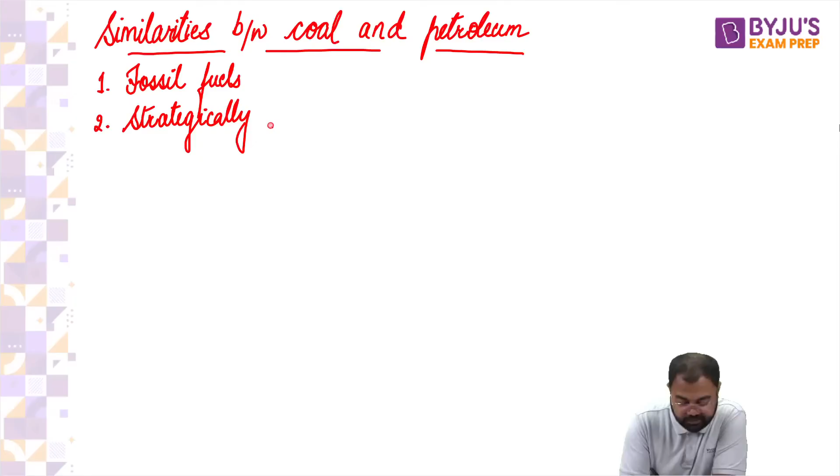So when it comes to petroleum, there are certain similarities and certain differences. Knowing the differences specifically is very important, so let's try to understand how exactly they are different and how they are similar. Similarities between coal and petroleum: they both are fossil fuels, strategically important for a country's economy, and both contribute to pollution and global warming. So these are certain similarities between coal and petroleum.

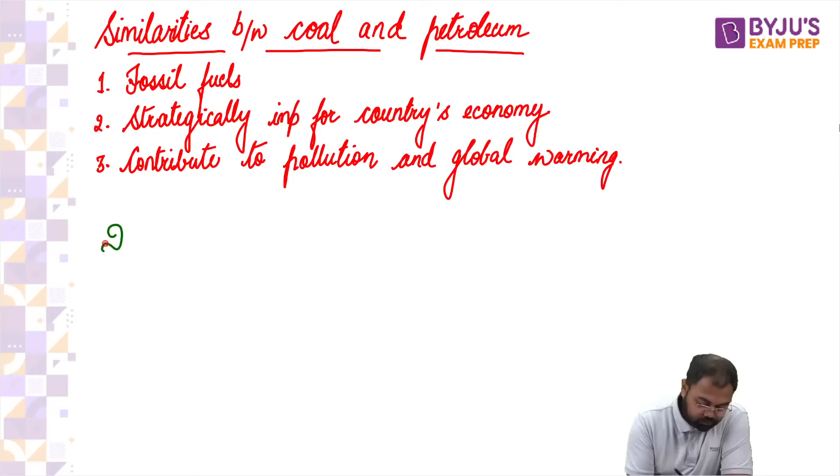Now what about the differences? Let's look at certain differences between coal and petroleum. First and foremost, the origin. When it comes to coal, we discussed that coal formation might have begun in the wetlands, in the marshy areas, in the swamps on land - so swamps and wetlands.

Now what about petroleum? In case of petroleum, the formation might have begun underwater. So the origin here has been underwater, meaning it started its formation underwater - it could be lake beds, sea beds, or ocean beds. In most cases seas and oceans, but even inland lakes might also have led to the formation of petroleum. Another difference between them is the source.

Now, the source for coal has been vegetation - all the trees and shrubs, etc., growing in these swampy areas contributed to the formation of coal. So the source has been basically vegetation on land, whereas in case of petroleum, that's not the case. In petroleum, there might have been both plant and animal based sources - it could have been algae, or it could have been zooplanktons. So both plant and animal based.

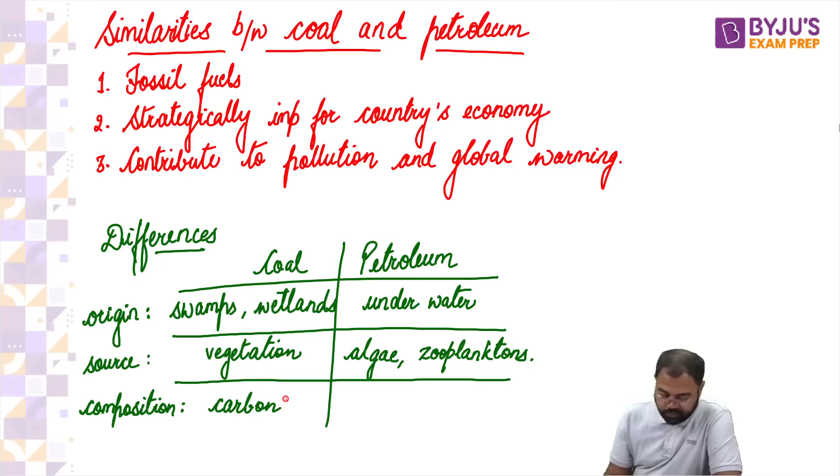Then another difference we see is the composition. Coal is carbon plus impurities. Coal is basically supposed to be carbon, and certain impurities might have mixed with it over time. Now overall, petroleum is said to be a complex mixture of hydrocarbons.

Hydrocarbons - what is hydrocarbon? We'll discuss this. So petroleum is made of a complex mixture of hydrocarbons. And then lastly, the state: coal is in the solid state, whereas petroleum could be solid, liquid, or gaseous. So state-wise also we see there's a difference.

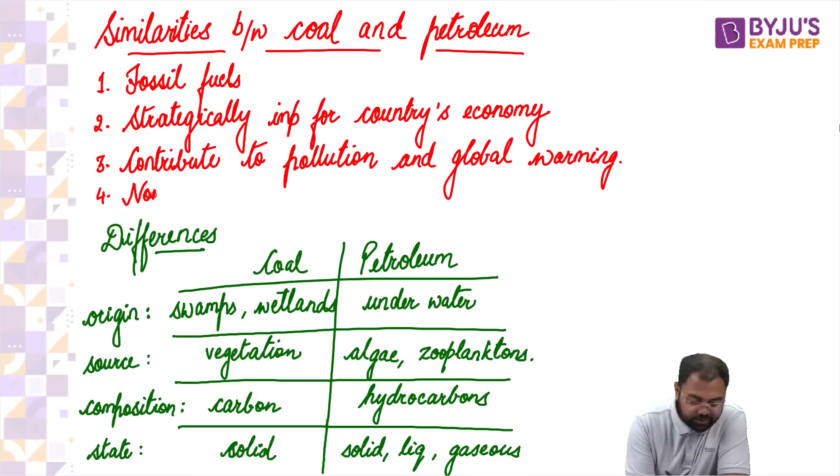So when you look at the science side of it, that is where you see that they are different. Otherwise, the other factors show similarities between them, and that's why they're often counted together. One major thing, very well known, but I missed it - they both will be called non-renewable. So in this manner, we see there are certain similarities and certain differences when it comes to coal and petroleum.

So now when we talk about petroleum, we are saying that petroleum is a complex mixture of hydrocarbons. So what do we mean? What's the basic meaning of complex mixture of hydrocarbons? What do we mean by a hydrocarbon?

So the name basically gives you a hint that you are talking about an organic compound. Organic compound meaning carbon based compound. Hydrocarbon - where you have only carbon and only hydrogen, any compound, any matter, any kind of material that has only carbon and only hydrogen. Apart from hydrogen and carbon, it does not have anything else. Then in that case, it will be called a hydrocarbon.

Now here we are saying that it's a complex mixture of hydrocarbons. Complex mixture means you might have a lot of different types of hydrocarbons which are really mixed together. That's why you cannot assign a chemical formula to petrol or diesel, because these are complex mixtures. There is no guarantee what exactly could be the chemical composition - there will be a mixture of all these hydrocarbons.

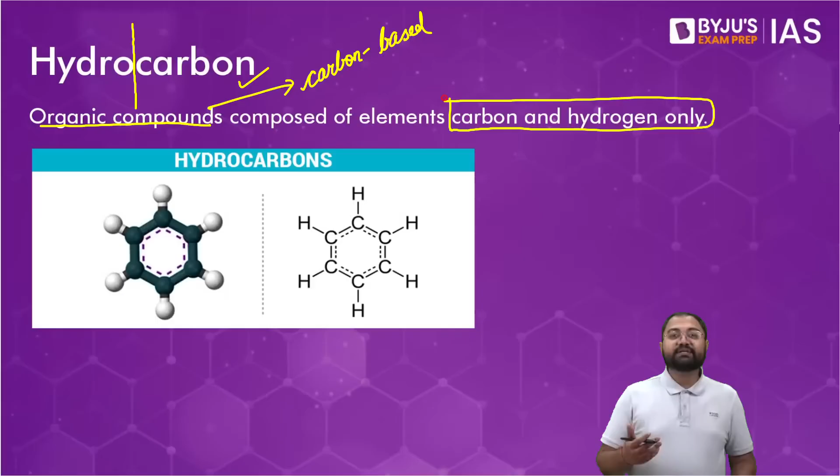So complex mixture - I'm just noting it out here. Complex mixture because it has many different hydrocarbons that could be mixed together in a petroleum product.

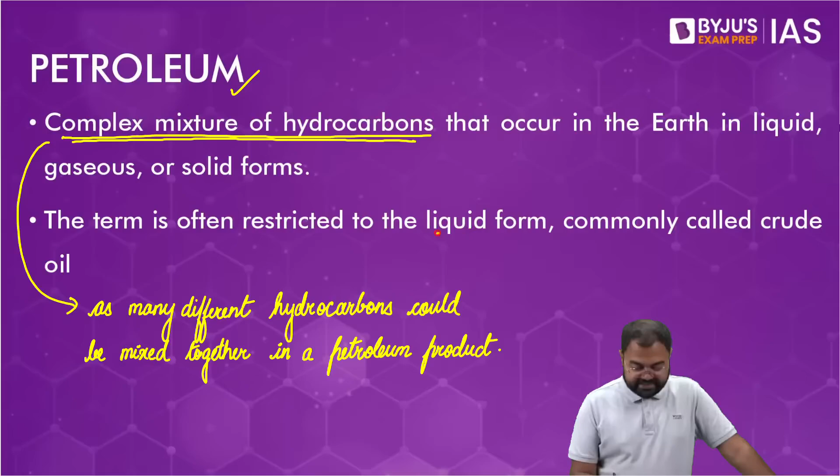So that is basically how we talk about petroleum, how we see petroleum. Often we restrict this petroleum to its liquid form, which is called crude oil. Crude oil is, you can say, the raw petroleum. And from this crude oil, we get all these different types of petroleum, whether it is diesel, petrol, kerosene, jet fuel, naphtha, or even paraffin, wax, etc. All these things are the things that we get from this crude oil. So crude oil basically is a mixture of all these different types of petroleum products.

Now what we need to do is separate them out, and to separate them we basically use a method called fractional distillation. But how exactly we do that, we'll have a discussion on that. But before that, let's also talk about how the formation of petroleum happens.

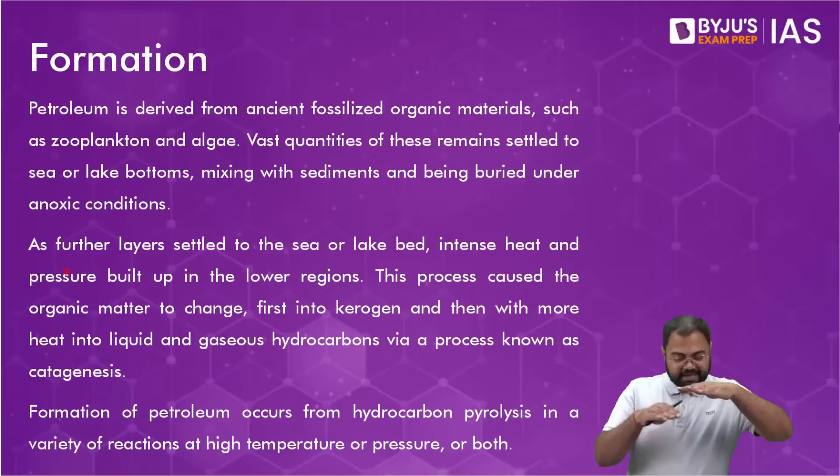Very similar to what we discussed about coal, the entire process is very similar. First and foremost, the formation here also would have begun from organic material like underwater plants and animals. They might have gotten submerged under the seabeds or ocean beds, and while getting submerged, they would have mixed with all the sediments. As they get submerged, they are going to get subjected to very high temperature and very high pressure. Under these conditions, a chemical change would have started in these organic materials.

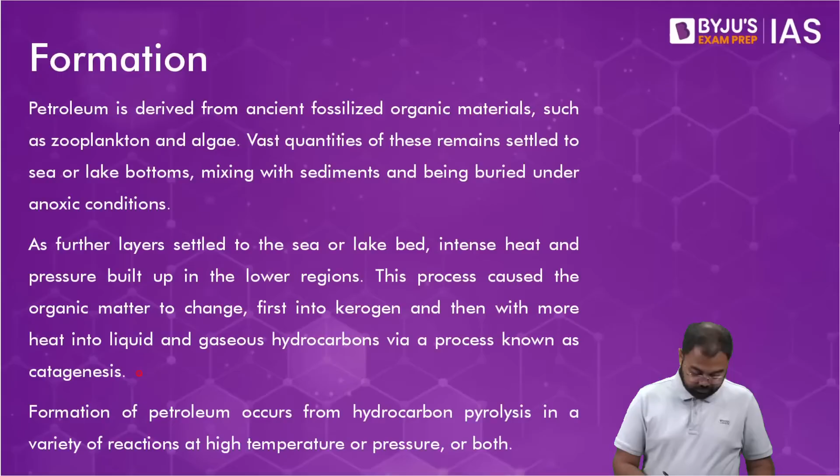That is where the formation of something called kerogen first takes place. First and foremost, they convert into something called kerogen. Kerogen is, you can say, an intermediate stage between that plant or animal and the final petroleum product. So between the two, the intermediate stage that we have is called kerogen, which is in a manner the in-process of change of the organic matter into petroleum. So first the formation into kerogen happens.

Now, in catagenesis, these longer chains of organic molecules start breaking down into smaller chains of molecules. So from an 80-odd or 90-odd carbon chain, you might see smaller carbon chains of just 10, 20, 15, 8, 7, etc. That breakdown from longer carbon chains into shorter or smaller carbon chains is called catagenesis. So that's why the next process here is catagenesis.

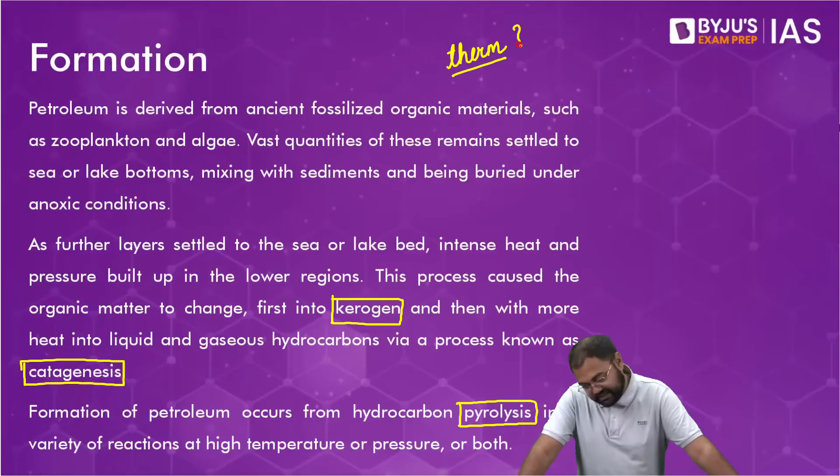Thermochemical—therm. Do you know what the term 'therm' is often associated with? Yes, absolutely—heat, as many of you have mentioned. So when we say thermochemical decomposition, it means there is a chemical decomposition of the material happening at high temperature in the absence of oxygen. That's called pyrolysis. So these three terms, these three processes, are the key processes to the formation of petroleum from the organic molecule of the plant or the animal.

Understood? So first and foremost, you have kerogen. What is kerogen? Kerogen is an organic molecule which is an intermediate stage between the organic material and petroleum. This is basically called kerogen. Now, after that—I'm just writing one more thing here—it is often found as sedimentary rocks.

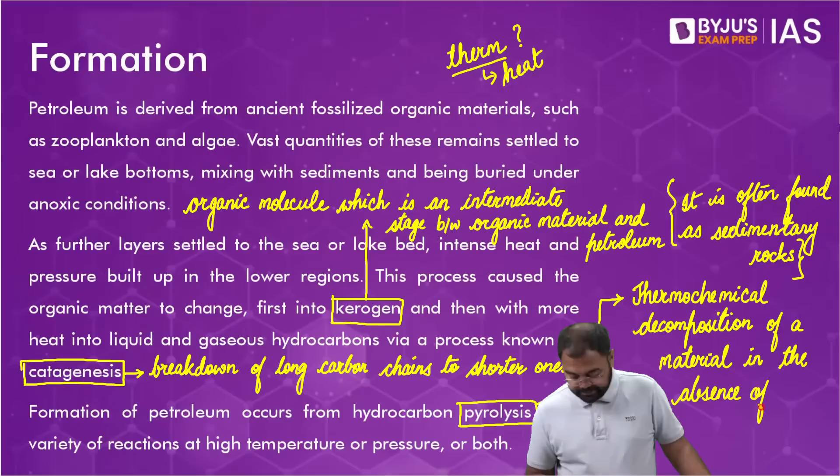And then finally we have pyrolysis. So what is pyrolysis? Pyrolysis is the thermochemical decomposition of a material in the absence of oxygen. So this is called pyrolysis.

So all these processes together lead to the formation of petroleum finally. Now this petroleum product that we get, we get it in the form of crude oil. This crude oil is a mixture of all the petroleum products, petrol, diesel, kerosene, etc. They are all mixed in this crude oil, and we need to get these products out of it.

So for that we use a process which is called fractional distillation. Now when it comes to fractional distillation, understand what exactly we do here.

Distillation is a process that we often use whenever you have to separate two miscible liquids, meaning when two liquids mix in one another. If you want to separate them, distillation is the process we'll have to use. For example, if you simply mix water in milk, milk and water are not directly separable, then you'll have to think of another process.

Similarly, a lot of organic liquids, when they mix in water, are completely miscible - they would completely mix with water. So if you have to separate out these two mixtures, you'll have to use another method. Distillation will be used when you have two liquids which have different boiling points and are miscible, meaning they can mix in one another but they have different boiling points. Then distillation is the process we would use.

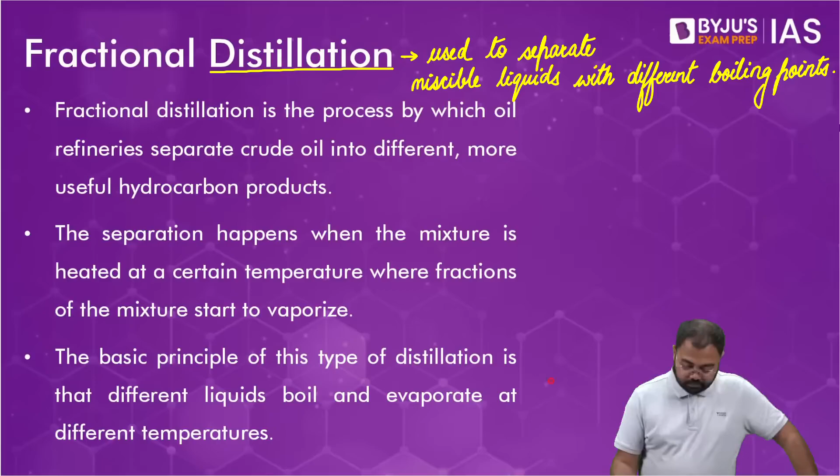So we first heat it above 400 degrees Celsius, and then we start to cool it down slowly. Slowly we'll start to cool it down, and we'll see that one by one we'll start getting all these different fractions, all these different types of petroleum. So at 400 degrees Celsius, first you'll get lubricating oil, paraffin wax, asphalt, etc. And as you keep decreasing the temperature, you'll keep getting all the different types of petroleum. That is basically when fractional distillation is used.

So fractional distillation is something that we will use when the difference in the boiling points of the liquids or fluids is generally less than 25 degrees Celsius. So when the difference in the boiling points of the liquids or fluids is less than 25 degrees Celsius, then fractional distillation as a process would be preferred.

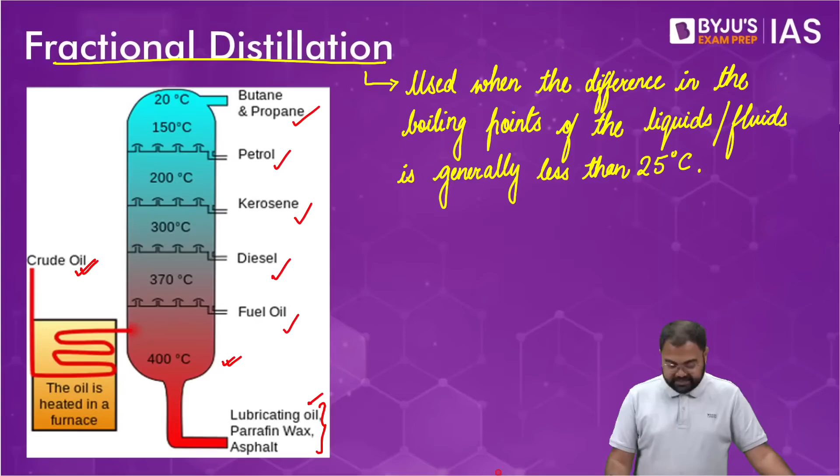So this is basically what we do: fractional distillation will be used when the difference in boiling points is very less, and normal distillation process would be used when the difference in the boiling points is good enough. So this is how this process of distillation or fractional distillation is used, and this is how we get all the different types of petroleum products.

Now, apart from coal and petroleum, there are some other non-renewable sources as well, which are non-conventional sources. Why are we saying these are non-conventional and non-renewable? Non-renewable, obviously, because they are available in a very limited quantity. But at the same time, they are also non-conventional because they are newer sources of energy that we haven't known about traditionally, and haven't used conventionally. That's why these are called non-conventional and non-renewable sources, where the first source here is shale.

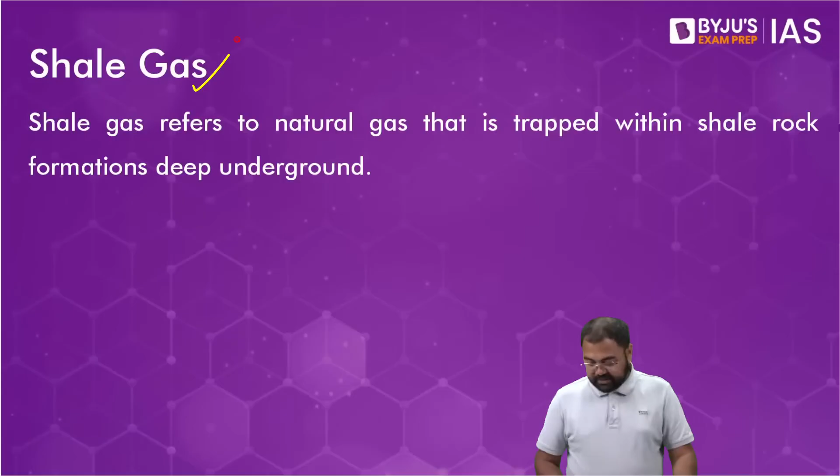Now, when it comes to shale, what we see is that shale is something that we get from a layer of shale rocks. We basically drill a well to this layer, and once we have gone to this layer, this is where we also start drilling horizontally.

As we drill horizontally, this is where cracks are produced in this layer, and that is where we have a lot of trapped gas, which is called shale gas. These are also hydrocarbons, largely methane and ethane, but they are trapped in this layer of rocks called shale rocks, and that's why the gas we extract from there is called shale gas. So this is basically how the extraction of shale gas happens.

Now, when it comes to shale, why are we saying that this is an unconventional source? We are saying that this is non-conventional and non-renewable. Now, this basically is a newer source, as I told you.

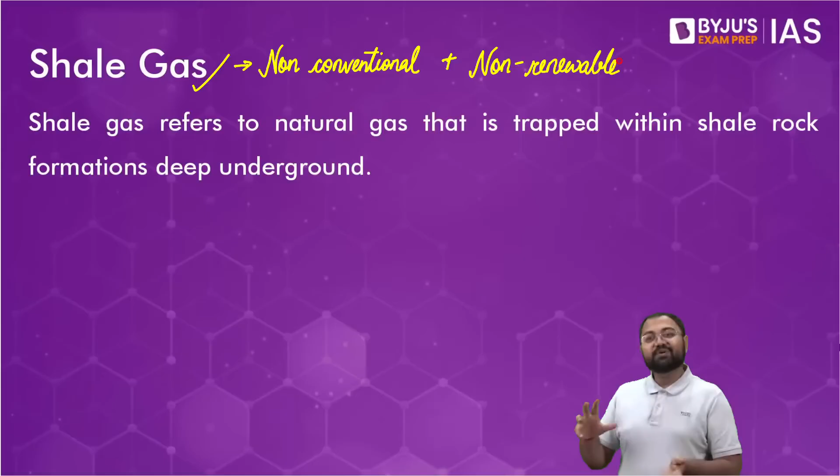First it was the US, and the US found that they have large deposits of shale. The amount of shale resources they found is so high that the US, before the discovery of shale, used to be a net importer of energy—they used to buy energy because they had a deficit as per their requirements. But after the discovery of shale, and finding such a huge deposit, they started becoming a net exporter of energy. So that's the difference that has come here.

The US was the country that found shale gas, and then others also. In a manner, a natural justice was done by God - Russia also found a lot of shale. So there is a balance: Russia has shale, the US has shale, and China also has shale. That's why the world is relatively at peace, or at least these powers were able to find sources of shale, which became a non-conventional, non-renewable source of energy.

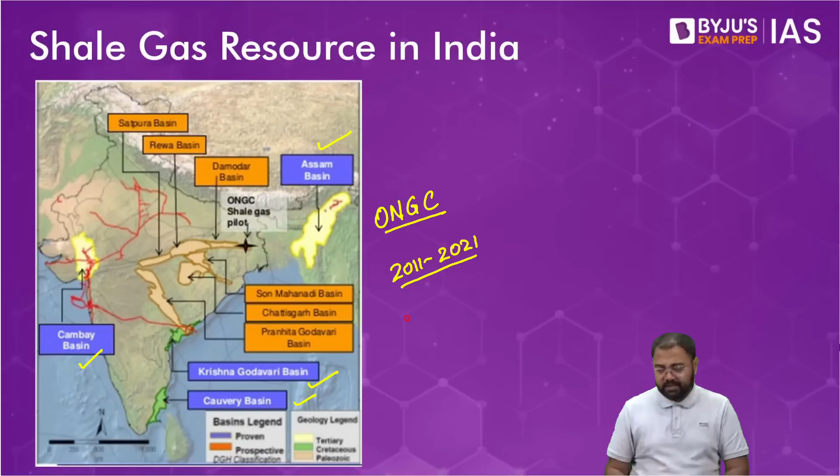We cannot look at shale as an alternate source, but we can see it as a small additional source. Perhaps we'll start extracting energy from here, but the promise is not great, so we cannot be dependent on it as a future source of energy. Although there is a pilot project running, ultimately they said they are not very hopeful regarding shale in India - the source is very weak and very little.

Overall, with shale extraction there are issues we see. It increases consumption of fresh water, because with drilling we send water at high pressure - called hydraulic pressure. This high hydraulic pressure causes fractures, called hydraulic fracturing. The drilling sends water at very high pressure to create cracks in the shale layers, so the consumption of fresh water is very high.

It can also lead to increased seismicity, meaning increased earthquake-like scenarios, because you are creating an imbalance and instability inside the earth. Then potential ground and surface water contamination is also possible, because this water might mix with underground water bodies. This fresh water isn't just fresh water but also has certain additives and chemicals added, which also pollutes the water.

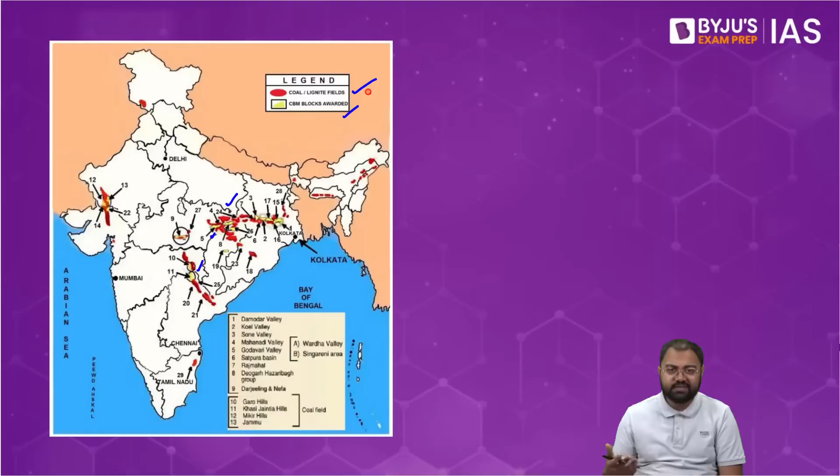The coal ministry has also said that they'll be actively trying to extract coal bed methane wherever possible. Otherwise, all that methane gets wasted, which is not good, because we know we can use this as a source of energy.

Now, after this, we have methane hydrate. When it comes to methane hydrates, what do we mean by hydrate first of all? Water, right? So wherever you have molecules of water, any compound with molecules of water will be called a hydrate.

Can you give me the example? Otherwise, I'll give you. What is the hydrate molecule that we are using in our daily life? Salt is a crystal, not exactly. Soap in a manner, you can say, but a better example would be washing powder.

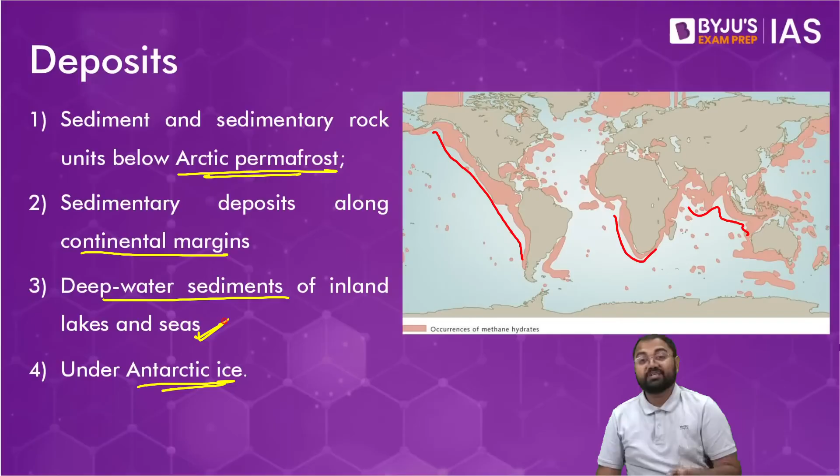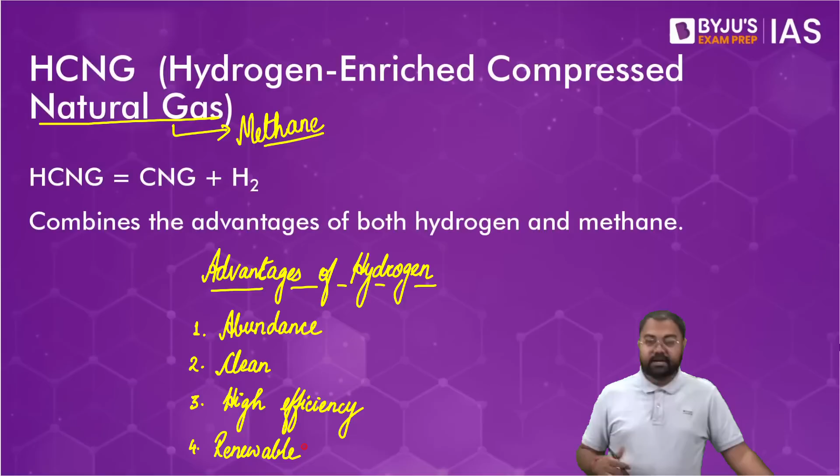In a manner, you can say that hydrogen becomes closer to being renewable. So that also adds to the advantage, and that is why HCNG. With HCNG, we see that it will be able to reduce the emissions of carbon monoxide, enable fuel savings, and the engines can be calibrated to release lower amounts of nitrogen oxides.

Similarly, we see that the modifications required in engines are also very minimum. If an engine is running on CNG, it will run on HCNG also. So it's not that we need new infrastructure or new types of engines altogether. Engines that work on CNG would, with very minor calibrations, be able to work on HCNG also.

Then after that, it can be used for high load applications and heavy duty vehicles, buses, trucks, etc. So there also we can make use of HCNG.

And that is basically what we also saw, that in Delhi, a pilot project was taken by the government of India where they started running buses in Delhi on HCNG as a pilot project, just to understand the viability of using HCNG and see whether we are in a position to start using it. For almost 6 months, a few buses in Delhi ran on HCNG to test it out. Now we are analyzing all the positives and negatives from that project, and depending on that, in the future we'll look into the viability of running public transport on HCNG.

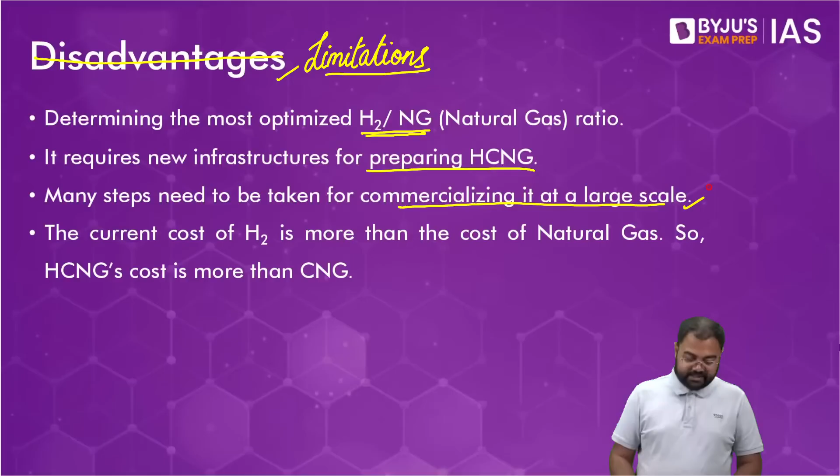And obviously the current cost of hydrogen is also a problem, because right now the cost of hydrogen is more than CNG.

When you are making HCNG, combining the two, the cost of production of HCNG will be higher than the cost of production of CNG. That becomes a problem because if you want to use it for public transport, you cannot ask the public to pay more. The government will have to take the responsibility for this economics spending. So from that perspective, this is not that great right now. The cost of manufacturing hydrogen is leading to this kind of issue, and that's why these are all limitations.

In the context of proposals to use hydrogen enriched CNG or HCNG as fuel for buses in public transport, consider the following statements. First, the main advantage of the use of HCNG is the elimination of carbon monoxide.

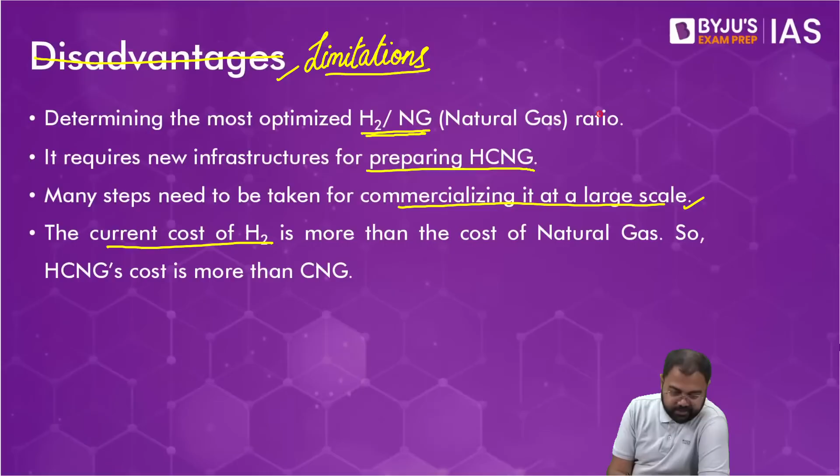Elimination. Remember we discussed something called extreme words, right? So elimination can also be bracketed as extreme. Elimination means completely getting rid of carbon monoxide. But what did we discuss here? We discussed that it reduces the amount of emissions of carbon monoxide. We cannot say that it eliminates carbon monoxide.

So elimination is wrong. A cannot be your answer and D cannot be your answer. You are left with either 2 and 3 only, or 4 only. So let us look at 4. Only one statement to see.

HCNG makes the fuel less expensive than CNG. It's the opposite, right? We discussed that hydrogen production is costly, so it will increase the cost of CNG. That's why HCNG is costlier compared to CNG. So 4 is wrong. Anyway, we are left with only 2 and 3 only.

So the second statement is HCNG as fuel reduces carbon dioxide and hydrocarbon emissions. Yes, that's correct, and that is why we are looking at hydrogen, because hydrogen is clean. We had discussed this. Hydrogen up to 1/5 by volume can be blended with CNG as fuel for buses.

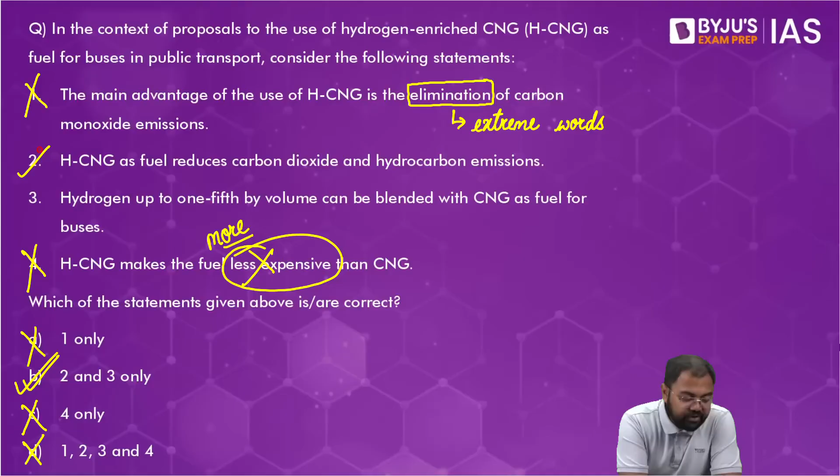Now see, this is a difficult statement. I would never be able to mark on the basis of statement number 3 unless I have the exact information from the newspapers. So that's why statement number 3 could have become difficult.

But as you see, in this particular scenario, we are not dependent on statement number 3 to answer this question. Yes, if they come to the present format, where they are asking whether only one statement is correct, or two statements are correct, or three statements are correct, or all four statements are correct, that is where this becomes an extremely difficult question to answer.

But with the elimination technique of the past, now the elimination technique also has not been eliminated completely. Yes, there still are such questions, but this time the number of those kind of questions was huge. There were, I think, 49 questions, if I'm not wrong, where it was one statement only, two statements only, and so on kind of question pattern. In that pattern, it would become a very difficult question, because statement number 3 is very factual and makes it extremely difficult to answer. But with the elimination technique that works here, it becomes easier for us to answer this question.

All right, so this is it about HCNG. Now this basically brings us to the end of all the non-renewable sources of energy. Now we come to the renewable sources of energy, and this is where we start with solar energy. So the first energy source is solar energy.

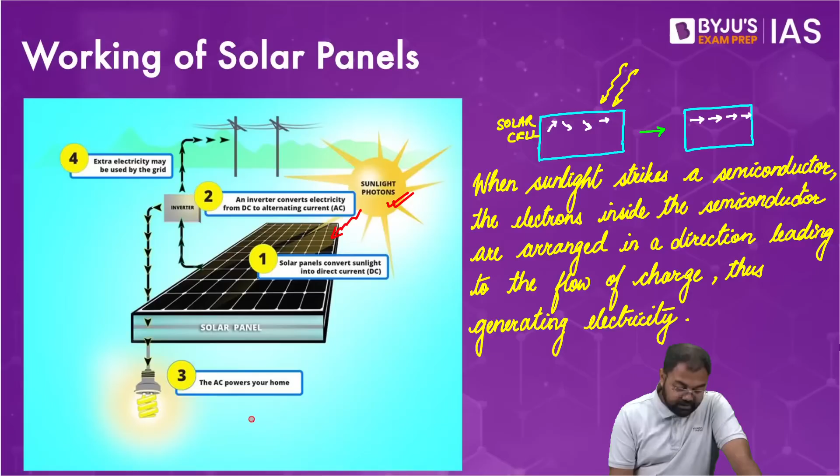And these solar panels produce electricity where the charge flow happens in one single direction. That's why this is a kind of current called direct current, or DC, and this DC has to be converted into AC, or alternating current, if you want to provide electricity to the houses.

So for that we use an instrument called an inverter. With the help of an inverter, we see that the direct current can be converted into alternating current.

Now direct current is the kind of current or electricity that we can store. For example, any electrical or electronic device that uses a battery - inside the battery you have stored energy or stored electricity that you can use whenever you want. So that is direct current, the stored electricity or stored energy.

But that's not something our houses use for providing electricity. For that, there's another form of electricity called alternating current. It's called alternating mainly because it alternates its direction, reversing multiple times in a given second. So the power supply we get in our houses is basically alternating current.

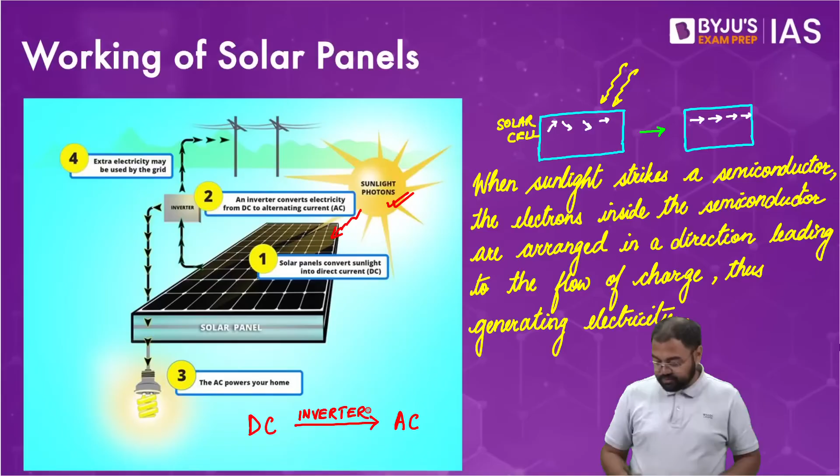Whenever electricity supply is cut off, what happens? This inverter has been storing energy all this while, and now this energy starts to pass through the inverter, and the stored direct current converts into the electricity we need in our homes. So this is basically how the working of solar panels happens.

Now, apart from solar panels, one more device that has been very important in India has been solar pumps. In the last 3-4 years, there has been a lot of emphasis given to solar pumps, and especially the use of solar pumps in agriculture. And then there are schemes also that have been run so that all these things can be achieved.

So solar pump, first and foremost, is the pump which will provide water maybe for irrigation purposes, largely in agriculture. These pumps will be connected to solar panels, and they'll provide you energy with the help of the solar panels. So instead of using diesel, we'll be able to use solar energy for the production of electricity.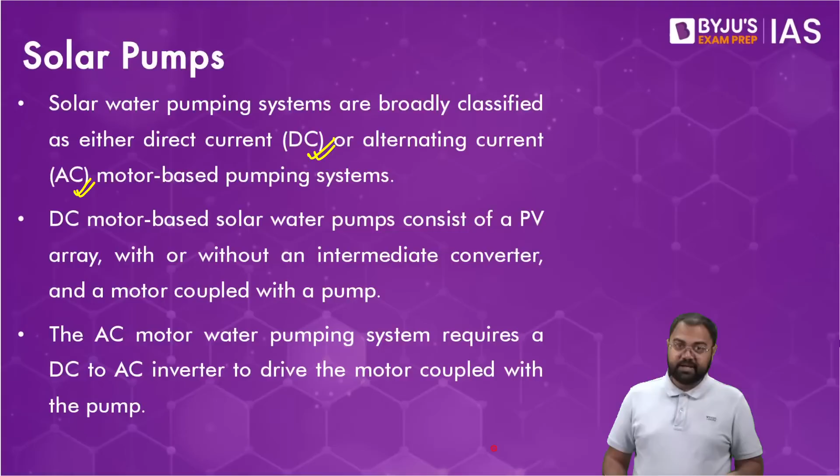Now, solar pumps either can be DC or AC based, depending on what kind of technology, what kind of electricity we want, whether we want to provide stored energy or whether we want to directly connect it to electricity supply. So depending on that, it can be either a DC or an AC solar pump.

Now, most importantly, there are two types of pumps. One which is called the submersible pump, and the second one which is called the surface pump. In case of submersible pump, this is the kind of pump where the pump is situated underwater. That's called a submersible pump.

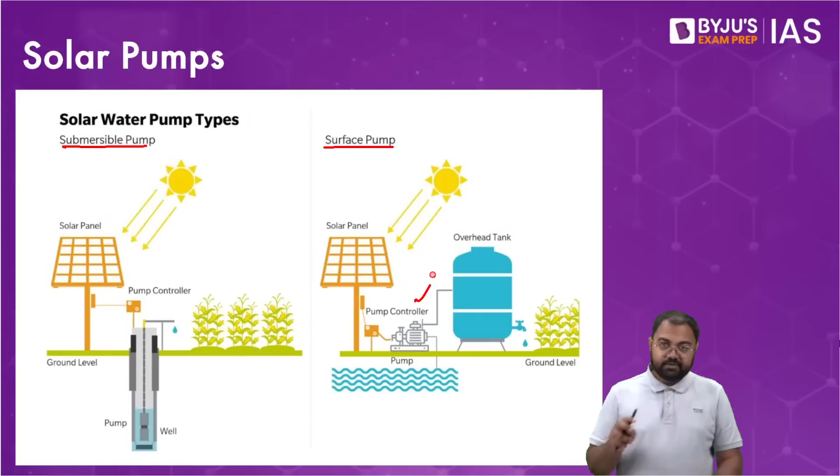And in case of surface pump, the pump will be kept near the body of water, not inside it. So generally, if you have a stagnant source of water, submersible pumps work well. But if you have a flowing source of water, surface pumps suit better. For example, if you have a well, a lake, or a dam, submersible pumps will work very good. But if you have a river or a canal, surface pumps will become good. So these are two technologies in solar pumps that are often used.

So that's surface pumps and submersible pumps. Now, when we look at the surface and submersible pumps, one more way in which technology is used in these pumps is centrifugal and positive displacement pumps.

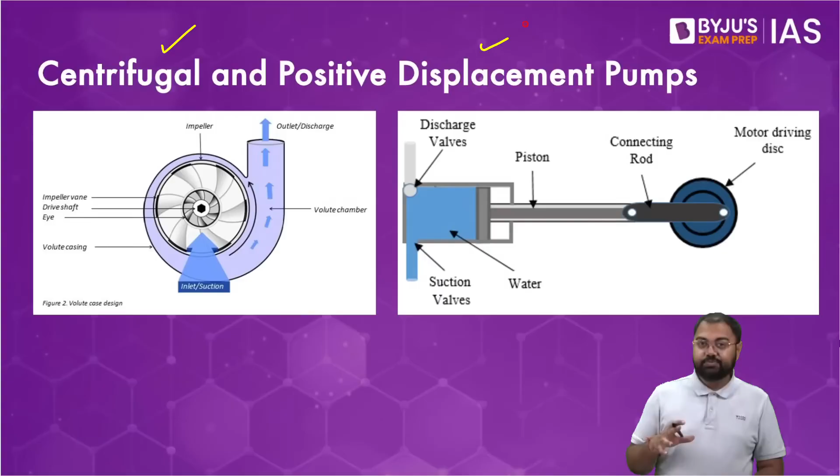Centrifugal pump is the kind of pump that uses centrifugal force. If you remember from the last chapter, when you have a circular motion, the force exerted outward in that circular motion is called centrifugal force. When we are using centrifugal force in any pump, it is called a centrifugal pump. There is a motor inside the body of water, and as the motor rotates, it will keep on throwing water outward. So in that case it is called a centrifugal pump.

The second one is a positive displacement pump. This is a kind of pump which works very similar to how an injection works. If you've seen an injection drawing something from a bottle of vaccine, you'll see they just pull the piston. As they pull this, a pressure difference is created inside the injection, and because of this pressure difference, there will be a capillary rise, and the liquid will rise inside the injection.

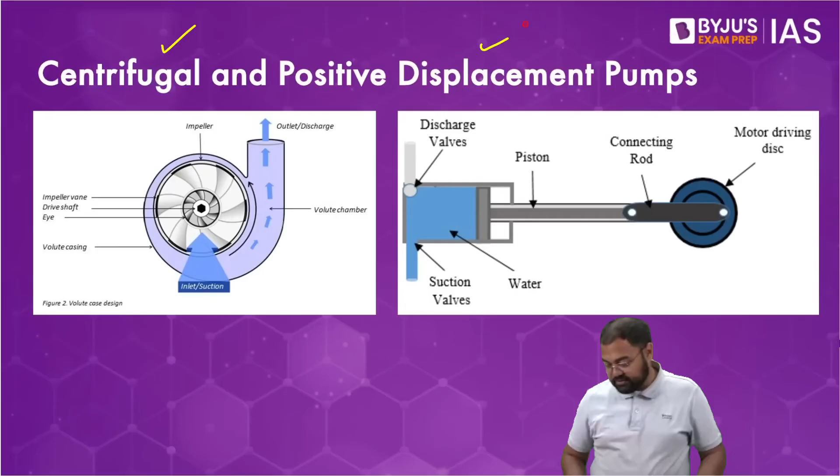Something similar is used in positive displacement pumps as well. In positive displacement pumps also you will have this kind of a piston, and as the piston goes up, the water level will also rise in the pump. So that is called a positive displacement pump. So that's your centrifugal pump and the positive displacement pumps, the two types of technologies that are used in solar pumps.

Now, in all these scenarios, there is a scheme called the PM Kusum scheme.

PM Kusum scheme. Under the PM Kusum scheme, the basic objective is to replace diesel pumps with solar pumps, and also solarization of newer areas - wherever you did not have any pump, any irrigational facility, or any pumping mechanism, or even diesel pumps working, these newer areas have to be tapped and pumps provided.

At the same time, wherever diesel pumps are already in use, they want to replace them with solar pumps, and this has its own advantage. First and foremost, you're not using diesel, so you have the environmental advantage.

At the same time, the agricultural diesel is subsidized, so government loses money giving it at a subsidized rate. Even for the farmers, even though they are getting the subsidies, they still have to keep spending that money so that they can get the irrigational facility. So all these are certain limitations of diesel pumps and other technologies right now.

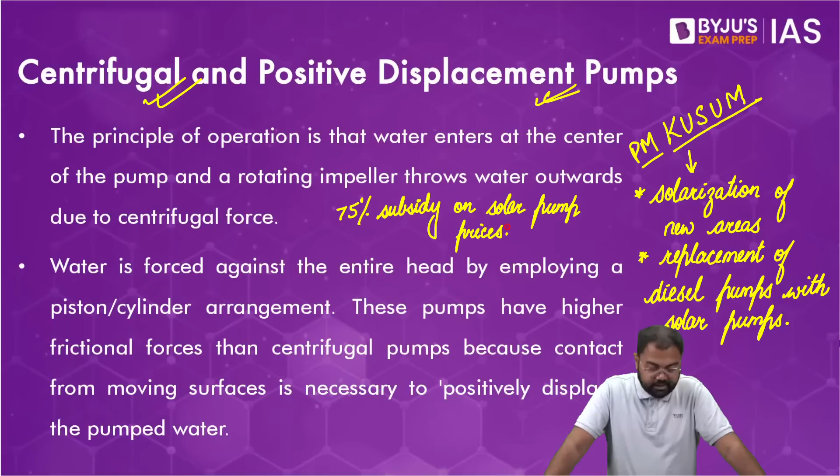So in this scenario, they'll be able to make it affordable for the farmers. This 75% subsidy means that if the cost of a solar pump is rupees 100, the farmer only has to pay rupees 25, and the rest 75 rupees will be shared by the center and the state government, making it easier for that solarization to happen.

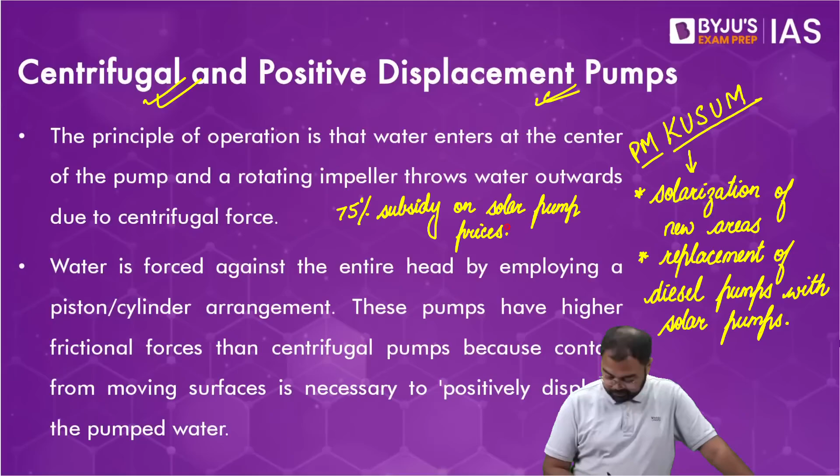Ultimately, there is something called the National Solar Mission. As a part of the National Solar Mission, the target that was kept was 100 gigawatt by 2022. Initially the target was only 20 gigawatt, but then it was revised on the sidelines of the Paris Climate Summit that happened in 2015, from 20 gigawatt to 100 gigawatt.

So we see that National Solar Mission ultimately tries to increase the total solar installation capacity that India has. We are trying to increase that capacity with the help of National Solar Mission, and there are a multitude of schemes that India has launched, all helping improve our solar energy capacity, making this mission very crucial from the perspective of India's solar capacity.

So to have long-term policy, long-term deployment goals, better research and development, and also getting the domestic production of critical raw material, critical raw material components and products - this is also very important, because this is where India also landed in a controversy.

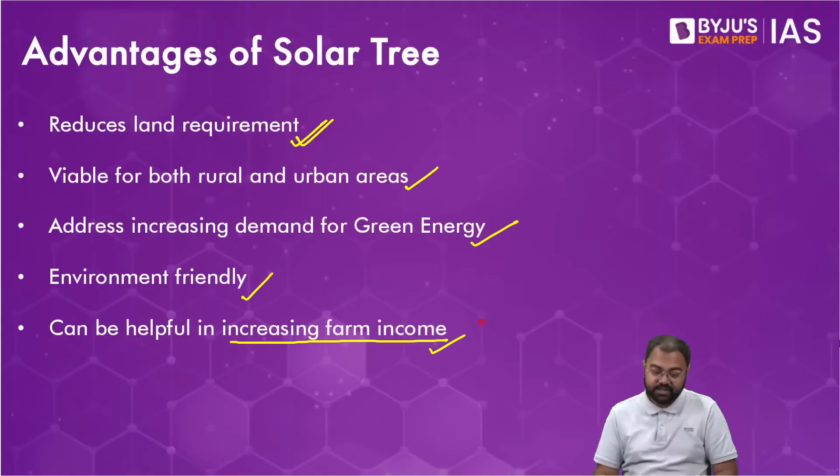Then it helps in addressing the increasing demand for green energy, because this is the way in which solar energy can actually be exponentially made to grow rather than the slower growth that it sees. Obviously environmentally friendly, and can also be used in increasing the farm income, for the farmers especially who let the installations happen. Wherever the installations are done on these kinds of farms, a part of the benefit can also be given to the farmers, and hence it can be used in increasing the farm income altogether. So overall, when we look at the advantages of solar energy, many of them are self-explanatory for you. It is renewable, environmentally friendly, wide availability because sunlight is everywhere, so we don't need to think about its availability.

Versatile, because it can be used in many forms. Low noise, because there is no movement, no machinery, so there's no noise factor. Maintenance requirements are low. It can very easily become a remote and portable power option. The return on investment is high because ultimately, the initial investment in solar energy could be a little high, but because it can work for a very long time, that's why these are not issues we are concerned about. So the return on investment is very good. Then

security is increased. Now, energy security means what? That when we become self-dependent with our energy requirements, that is called energy security. And we obviously want energy security in one way or the other.

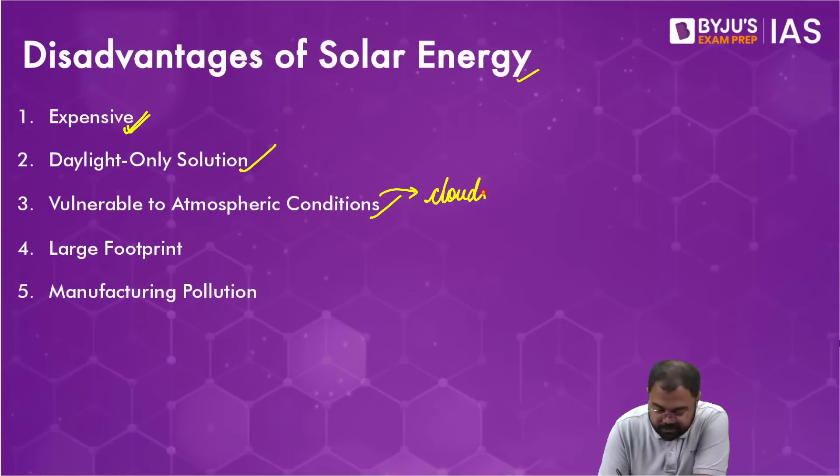So that's why clouds, rain, or even air pollution—all these can reduce the production. Then a large footprint, basically what we discussed about the large land requirements.

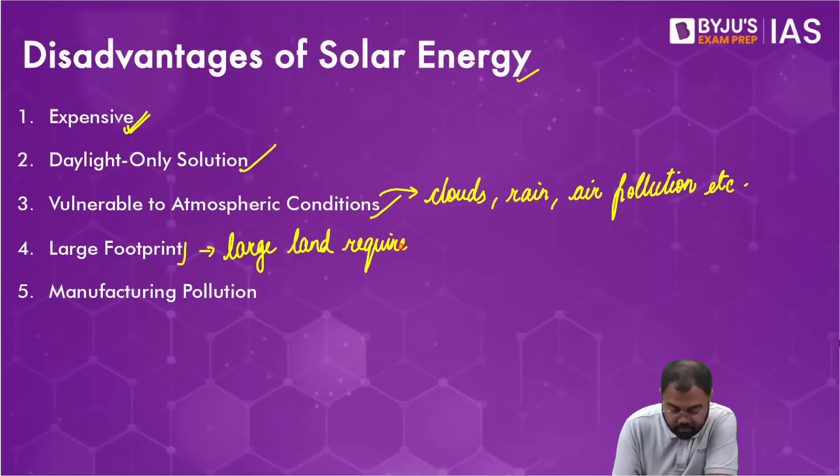And then lastly, manufacturing pollution. Manufacturing pollution is basically the kind of pollution that can happen while the manufacturing is done, right? The pollution while manufacturing of solar panels and other key components—that will lead to manufacturing pollution.

One more problem is the waste that will be generated. For example, let's say any normal given solar panel will be functional for 10 to 15 years. So right now we do not see it as a threat because most of our solar panels are newer—2016, 17, 18 onwards, we saw that a lot more solar energy has been used. But now, when they are functional for 10 to 15 years, that is where the disposal of the waste will become a problem. So in a manner, it can lead to a situation where e-waste management can be threatened.

So that's another point that we need to understand and add—how exactly do we recycle or get rid of the waste. So that's why we see all these problems that we have with solar energy. But whatever the scenario, still you have to understand that there is no better source than solar energy. It's one of the easiest sources to use, and one of the most easily available sources to use. So these disadvantages are nothing as compared to the kinds of advantages that solar energy is able to give.

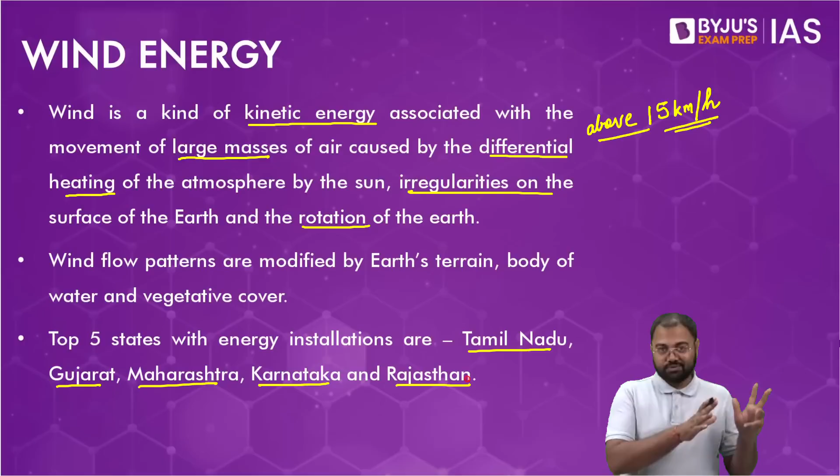So if you look at the top 5 states in India with regards to wind energy production, you'll see Tamil Nadu, Gujarat, Maharashtra, Karnataka, and Rajasthan. Out of the top 5 states, 4 are coastal states, and the fifth is Rajasthan, which is a desert state. That's why you have large open spaces available in Rajasthan as well, and that's why Rajasthan also makes the cut to the top 5 states in wind energy.

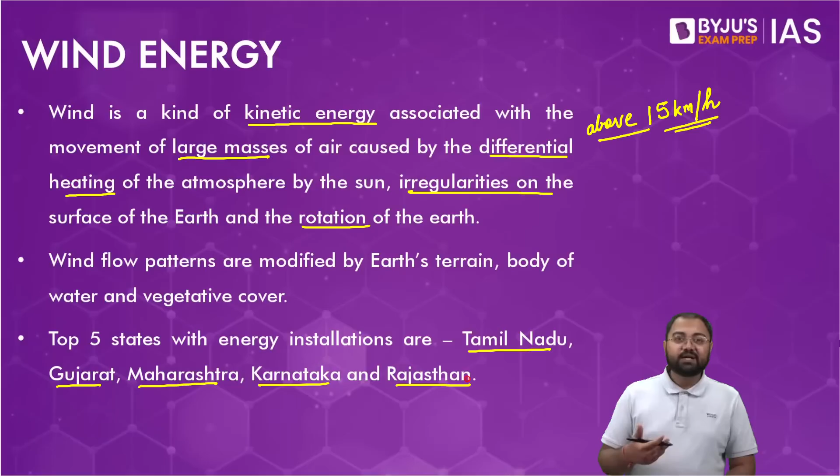So wind energy is a source where coastal states will be able to contribute more as compared to inland states, because you need a certain movement to happen. That's why when speeds are above 15 kilometers per hour, it becomes easier for us to harness that energy, that is wind energy.

Now, with regards to how wind energy functions, first and foremost the rotation of the wind fans will happen. Windmill fans will rotate, and with this rotation, kinetic energy is produced. We know that energy produced due to movement is called kinetic energy. So that kinetic energy of the moving air will lead to the movement of the fans, and that is ultimately converted into electricity. So basically there is a conversion from kinetic energy to electricity. This is how the conversion of energy takes place.

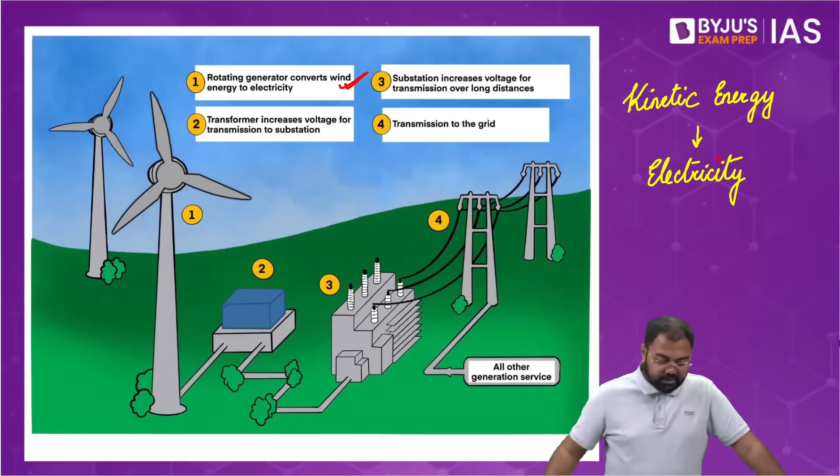Now, in case of wind energy, there is something that has been growing, called offshore wind energy. In case of offshore energy, instead of installing on the coast or in inland areas, we are going into the body of water, on the continental shelves. That is where these installations are now being done.

In this scenario, this is an energy source that has been growing, although not as fast as onshore wind energy, but offshore wind energy is also growing. For example, according to last year's end-of-year report that was published, the total offshore wind capacity of the world right now is 63.2 gigawatt.

Now just imagine that when it comes to onshore wind, India itself has achieved up to 45 gigawatt as of now. And in offshore wind, the entire world combined has been able to generate up to 63.5 gigawatt, now 63.2 gigawatt.

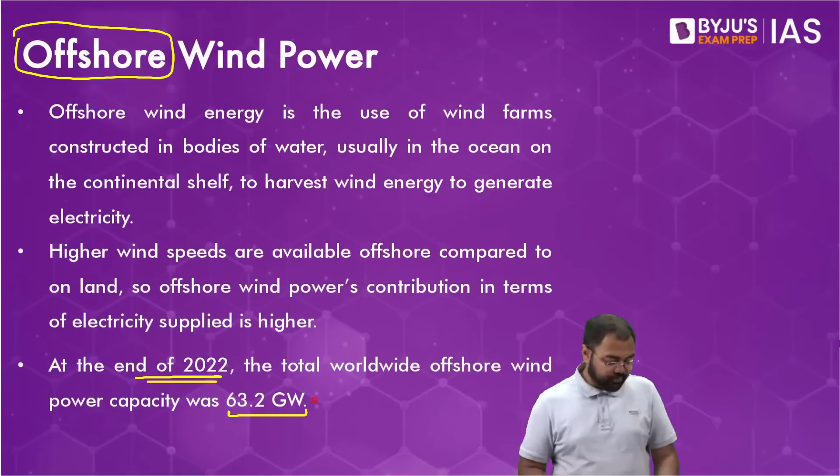So that's why right now we have been trying, but it's not that we have been moving very fast. For example, India also has been trying, and there are certain zones that we have picked, mainly in 2 states, Gujarat and Tamil Nadu. These are the two areas that have been chosen, and these are the areas from where we are going to begin.

There is a pilot project that we have started, and at the same time we are also taking help from some of the other countries, because when it comes to the growth of offshore wind energy, we have seen that the European countries have done very well, especially the North European countries. They have done very well, and apart from that, China has been doing very well. China of late has been very aggressive in setting up offshore wind.

And they not only have been using their own coastal areas, but also controversial waters that you might have heard of, for example the South China Sea. In all those areas which are controversial, where waters are also being claimed by other countries, China doesn't care. Unfortunately for us also, we have been facing that a lot. But in those waters, they simply have been setting up their infrastructure even for offshore wind power. That's why China has been growing very fast with regards to offshore wind.

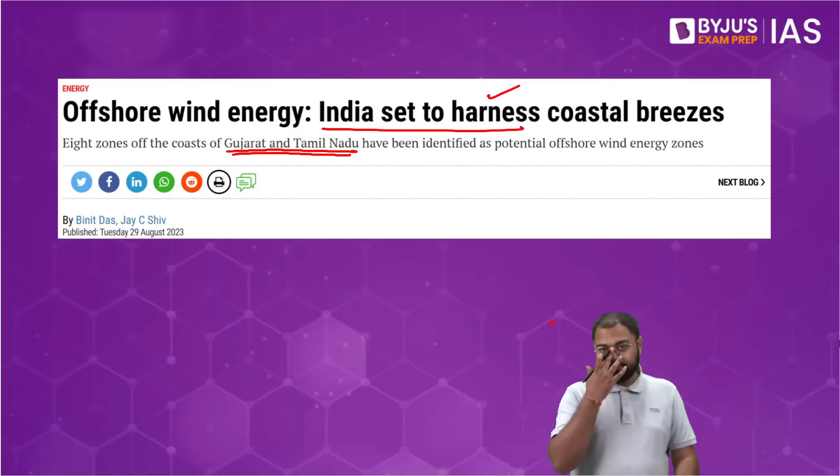Right now the European countries lead, but I'm very sure that very soon China will start leading when it comes to offshore wind energy. We have been taking help, as I told you, from some of the European countries which have been very good with regards to offshore wind, who have some experience with offshore wind. So that's why these countries will be of good help.

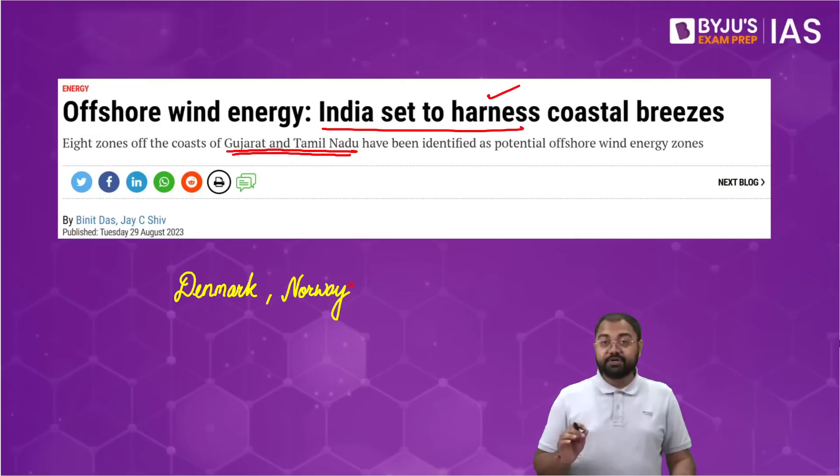So for example, countries like Denmark and Norway, they can be very, very good because they already have good capacity and good experience with offshore wind energy. That's why they can be countries which can get us also the help, so that we can also get it going.

So that's why we already see that all these are the things that India has been working on, and we have been contacting the governments of other countries as well. For example, with Denmark, we have signed an MOU, so that Denmark will help India build offshore.

All right, so offshore wind energy. Let me just write it clearly - offshore wind energy. Right, so in this manner, we see that we have been actually working on all these projects as well.

But harnessing offshore energy is not going to be very easy. So first and foremost, as I told you, a lot of data collection is required, because we need to understand whether the area is suitable, whatever area we are choosing. So we need to study the suitability of an area with regards to the long term setup.

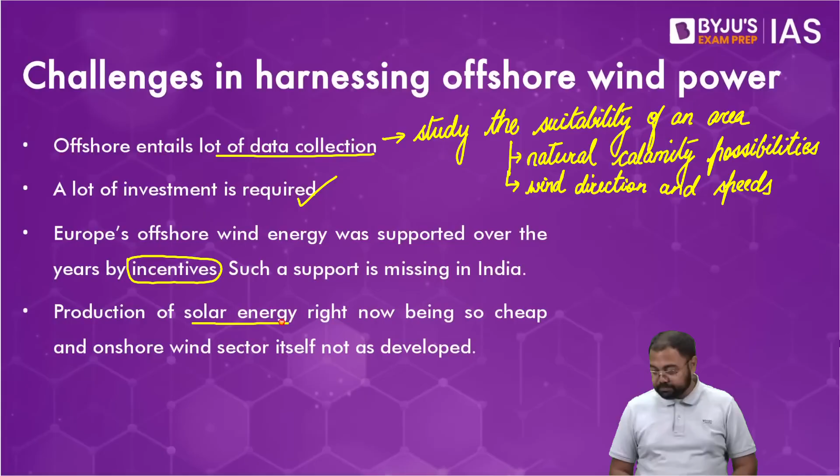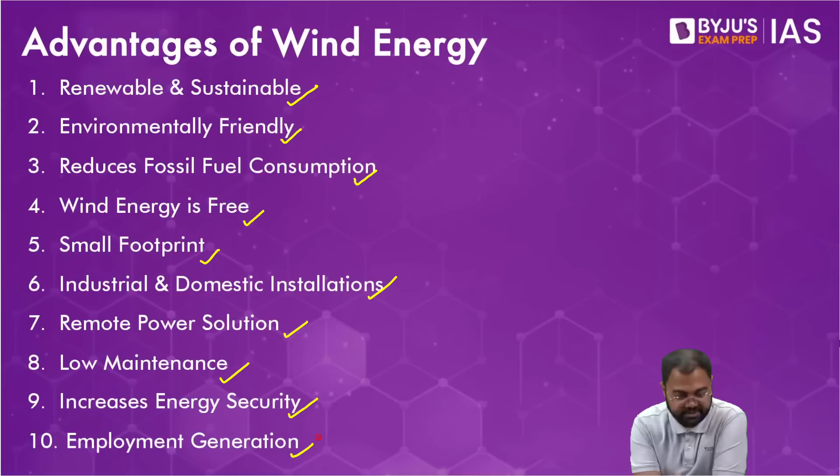So that is where we are. Overall, when it comes to the advantages of wind energy, it is also a renewable source, environmentally friendly source, reduces fossil fuel consumption. Wind energy is also freely available. It has a small footprint, unlike what we discussed in solar energy, because it is a vertical setup anyway. It can be used for both industrial and domestic installations. It can also become a remote power solution. Maintenance requirements here also are less. This also helps us in increasing our energy security and also helps in employment generation. So everything that we discussed with solar energy, almost similar points with regards to wind energy also, so I don't think a lot of explaining is required there.

But when it comes to disadvantages, first, the fluctuations are a big problem. Fluctuations, because we need a certain wind speed, only then the harnessing is possible. So that is one of the issues that we have. Apart from that, it can also become expensive initially, just like what we discussed in solar energy also. But again, because the maintenance requirements are low, it functions for a very long time, so overall return on investment is very good. But initially it is expensive.

Then, it can also pose a threat to wildlife, and this is something we need to understand very well. Wherever you are setting up a wind farm, obviously the fans of the windmills will keep on moving. For the birds living in the nearby areas, this can become a menace, because they would understand that they might possibly hit the wind fans and lose their lives. So they would also understand that, and they'll start avoiding those kind of areas. They might perhaps also start looking for a new habitat altogether, because now they know that their movement in this area is not that easy.

So then they look for shifting of the habitats. Now shifting of habitats is not going to be easy, because let's say a bird wants to move from one ecosystem to another ecosystem. In that new ecosystem also something similar to this bird already is present. There is a food web that is functional everywhere in any given ecosystem. So even if they try to move to a new habitat in a similar ecosystem, it's not going to be easy for them to settle down there, because there would be somebody else already there.

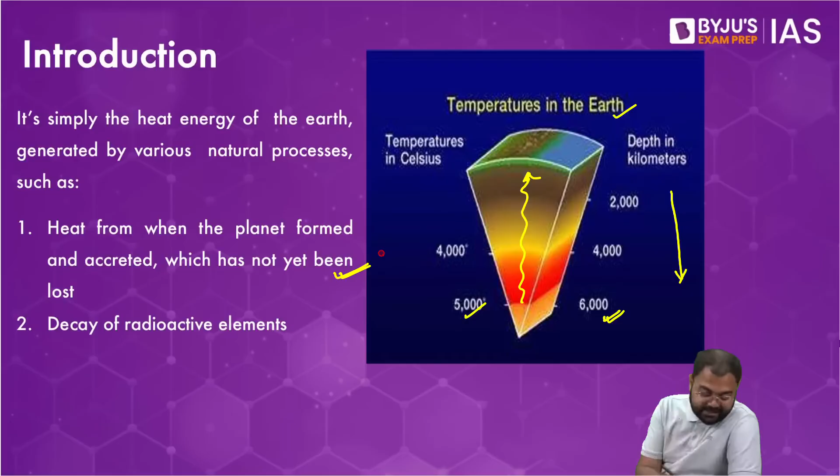So one source is the heat coming from inside the earth, trapped inside since the time of the birth of the earth itself, the formation of the earth. And second, the decay of radioactive elements can also lead to the generation of geothermal energy.

Now, radioactive elements, what are they? How exactly do they heat up, etc.? We'll discuss later, maybe in the next class when we go to nuclear energy. So just remember for now that there are two sources: one, the heat inside the earth since its birth, and secondly, the radioactive decay of radioactive elements.

So in these two scenarios, this is where we get the geothermal energy from. That's why there are multiple different types of reservoirs from where we can get this energy. Hot springs, volcanoes, or even geysers, etc., they can all become sources of geothermal energy reservoirs.

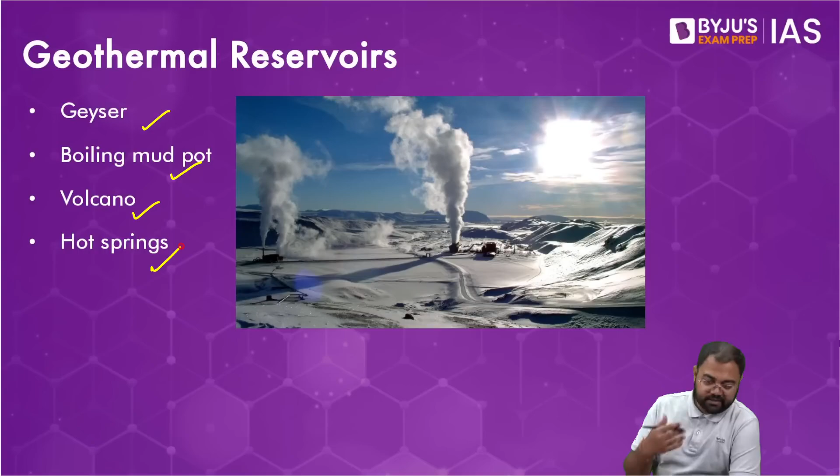Now, when we look at these geothermal energy plants, we see that there are different ways in which geothermal energy is being used. So there are three different types of geothermal energy plants: dry steam power plant, flash steam power plant, and binary cycle plants. These are the three ways in which we can get geothermal energy.

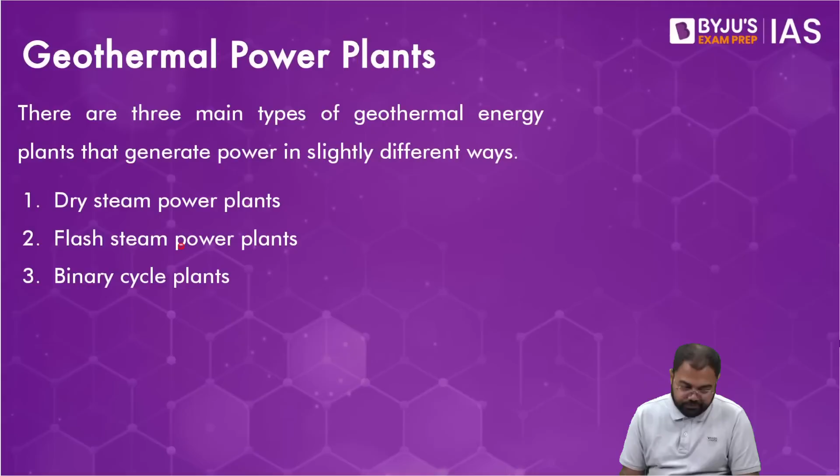First and foremost, we have the dry steam plant. Just understand the basic principle of how it works. In case of a dry steam plant, the heat from inside the earth will come to the surface, go to the turbine, leading to the movement of the turbine, and with that movement you get electricity. From there it goes back, and a cycle repeats. That is how the dry steam power plant basically works.

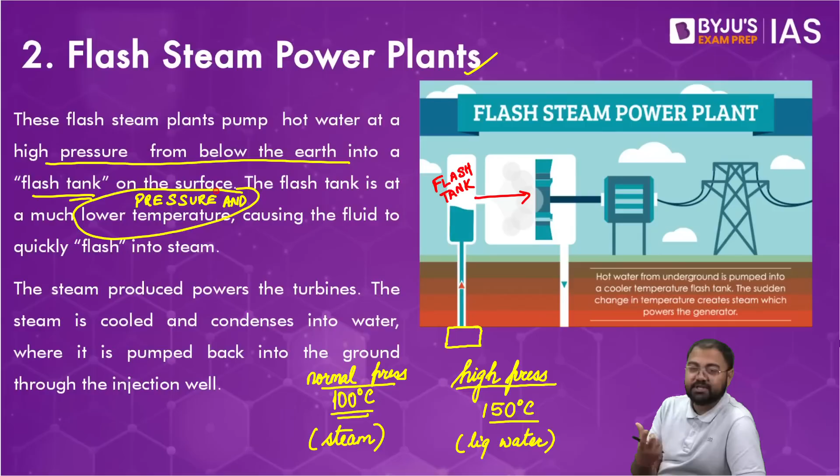Flash steam plants pump hot water at high pressure from below the earth into a flash tank on the surface, and the flash tank has much lower pressure. Since both pressure and temperature are lower there, the water will quickly flash into steam. That is the basic reason why it's called the flash steam power plant.

Then after that, there is something called binary cycle plants. The term says binary, meaning two, so there are two cycles running parallelly here. That's why it's called a binary cycle plant.

This organic liquid has a lower boiling point, so as soon as the heat from inside the earth comes in contact with it, it will very easily convert into steam with lower energy requirements. That's why in binary cycle plants, the steam then goes to the turbine, rotates it, and electricity is generated from there.

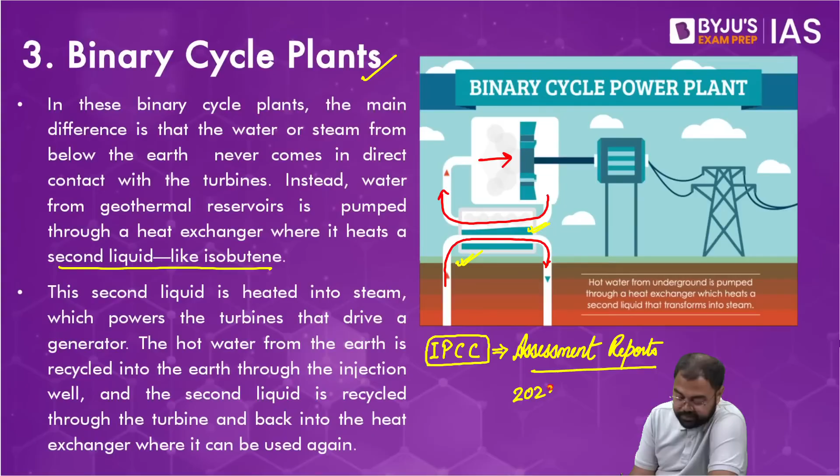For example, there is something very crucial that they produce called the assessment report. Until now there are 6 assessment reports that have been published, the latest one last year in 2022. These reports come every 5 to 7 years or so. For example, the 5th assessment report came in 2014, and the 6th came in 2022. They do exhaustive research on all the data and studies done on climate change, try to draw conclusions, and publish those reports. So they become very crucial.

Now, there was another study they had done, based on all the different types of renewable energy and how polluting those renewable energies can be, or whether they also contribute to pollution and climate change in one way or another. In that study, what they found is that binary cycle plants are the cleanest source of renewable energy.

Cleanest source of renewable energy - this is what IPCC said. So even compared to solar energy, wind energy, biofuels, and even other forms of geothermal energy, binary cycle plants, according to that report, are the cleanest source of energy. That is the importance of binary cycle plants, and that's why we are working on them and want to build more such plants in the future.

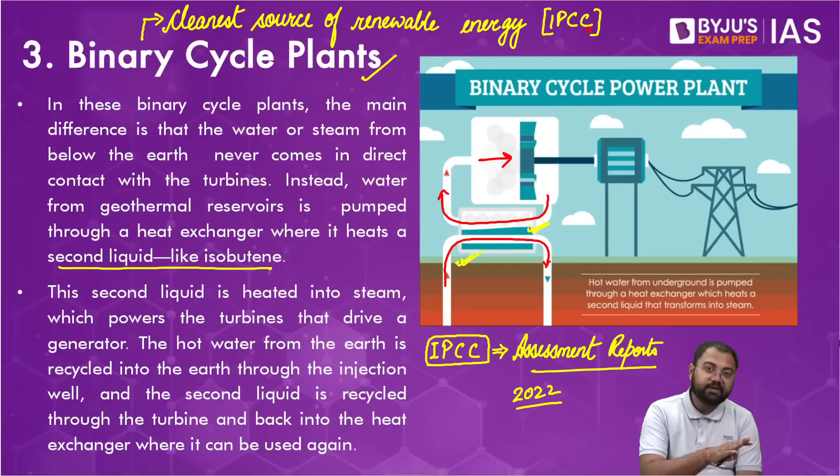Dry steam power plants have the least efficiency; they are the least efficient. Compared to them, flash steam power plants are better, and compared to that, binary cycle plants are much better. That's why they were actually in the news a couple of years back.

Now coming to geothermal energy, there are certain areas where we have been able to map the presence of geothermal energy in India. The total geothermal energy potential for India is said to be 10 gigawatts, and there are areas marked for those 10 gigawatts - the Himalayan areas starting from Ladakh, then Himachal, Uttarakhand, and also Sikkim and Arunachal Pradesh. These states are marked because we know the tectonic lines run through them, and that's why these areas are so good with regards to the potential for geothermal energy.

But apart from that, there are other areas also, for example the Sonata region, or the Son-Narmada-Tapti region, which has also been marked. There are other areas marked too, so we see there are potential areas where India has chances of geothermal energy. ONGC is basically mapping India's 10 gigawatt geothermal energy potential.

This is basically something that ONGC is doing, and even this map is an ONGC map. This map also is a potential map published by ONGC with regards to India's potential in geothermal energy.

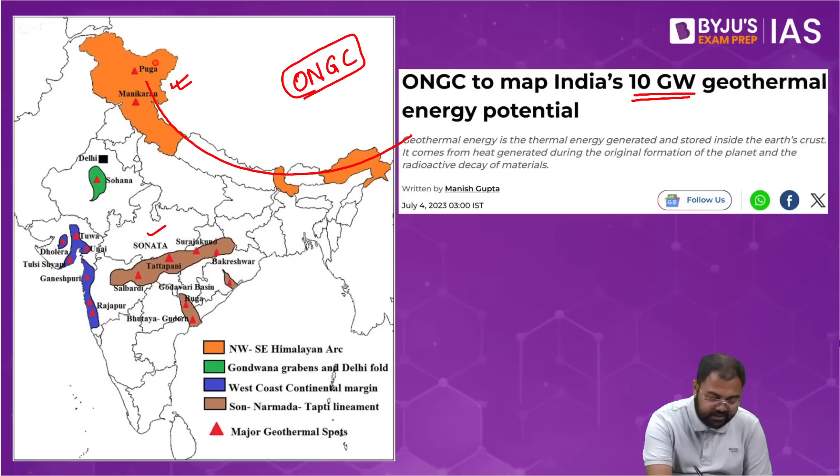Right now we have taken small steps in regards to what we are doing with geothermal energy. We have marked certain areas, for example the Puga Valley in Ladakh. This Puga Valley area becomes a very crucial area for India, where there was an MOU signed between ONGC Energy Center and Ladakh Autonomous Hill Development Council for the first geothermal plant being developed in the Puga Valley.

So Puga Valley is in Ladakh, a very beautiful place, and you'll see that there are hot springs all around Puga Valley. That is what they want to tap, and by tapping it, they will try that at least the local requirements of energy can be sorted. Because these are very harsh, far off, remote areas, away from any thermal or hydroelectricity source, getting electricity there for the government of India hasn't been a very easy task. So this is where all the local requirements of nearby villages and townships can be solved with the help of these energy sources. That is how in Puga Valley we are seeing this development.

At the same time, the Geological Survey of India has identified that there are almost 340 geothermal hot springs in the country, which can become potential sites for geothermal energy in India.

Apart from that, last year there was another development where Geothermal Core of Texas signed a letter of intent to invest rupees 820 crores in producing geothermal energy in the state of Uttar Pradesh. There are also smaller programs in other states, for example in Chhattisgarh and Andhra Pradesh. There is also an Iceland based company, because Iceland has a lot of volcanoes and hot springs, making it one of the leading nations in geothermal energy. This company, called Reykjavik Geothermal, has also come to India and shown interest in setting up a geothermal energy power plant.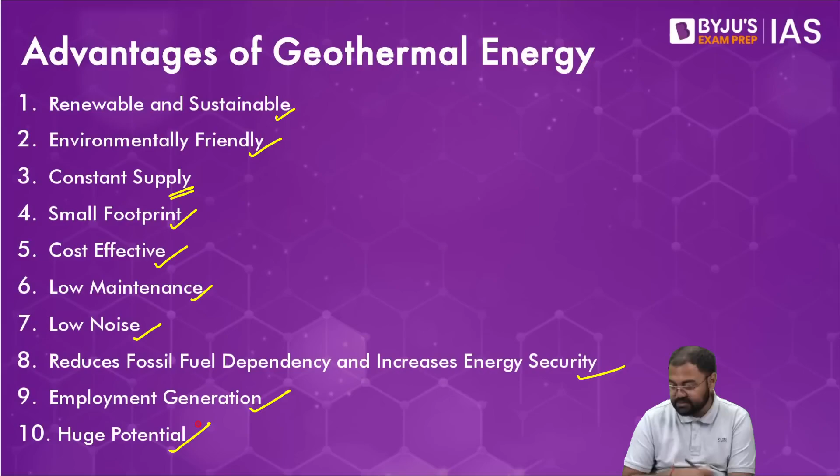Then it has a smaller footprint because the setup is generally done underground, so it does not affect the ground above. Also these are not agricultural areas, because there will be a lot of emissions like sulfur, and the heat is very high, so not very conducive for agriculture. Then it is also cost effective as a long term solution, maintenance requirements are pretty low, and the noise is also very low. It also enhances our energy security, employment generation, and has a huge potential. So advantages are more or less self-explanatory.

Disadvantages: the very first disadvantage is geographical limitation, because it's not like solar energy that you can get from anywhere, or wind energy where there are areas from which we can very easily get this energy. First and foremost, we need to identify the areas and hot springs which are good enough and conducive enough to get energy from. There are many reasons that come in the way of using geothermal energy, so it needs a lot of investment. At the same time there could be possible environmental impacts, because these are areas from where hydrogen sulfide gas could also be produced.

Potentially, there's the risk of hydrogen sulfide gas, though we haven't seen it happen yet. Chances are there. Then there are sustainability concerns as well, whether these are good, long-lasting sources or not. So there are all these issues.

And lastly, there are chances of seismic instability in these areas, which can also be prone to earthquakes. You know about India too, these tectonic lines are very unstable. Very recently we saw a couple of earthquakes with epicenter in Nepal, the same Himalayan region. We see that kind of instability in states like Uttarakhand, Himachal Pradesh, and Sikkim too. So we know these are not very stable areas, and there are chances of seismic instability being induced because of geothermal energy.

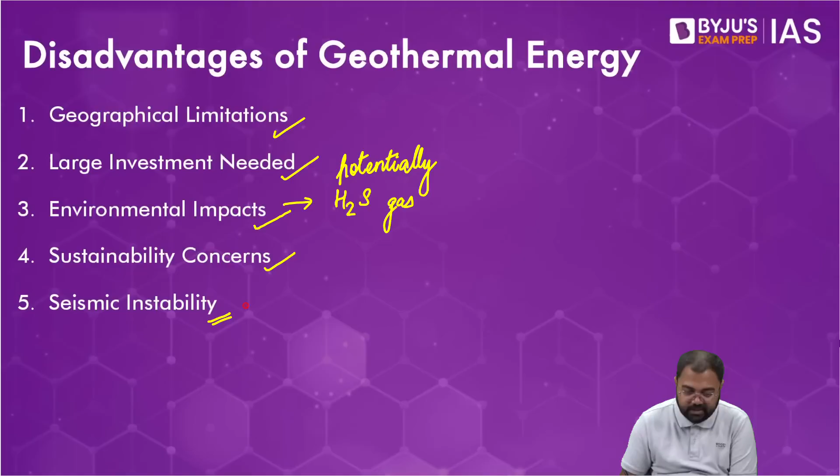There are examples of this happening in the past, not in India, but other parts of the world—one in Switzerland, one in the US. In both cases there was a very small earthquake, on the Richter scale perhaps just 3.7, 3.8. Not a huge earthquake. But when they researched the epicenter and possible reasons, they found these were areas where geothermal power plants had been set up, and that's something leading to these kinds of instability situations. So these are all the problems geothermal energy could bring with itself.

Now, coming to the last source of energy in this segment, this is bioenergy. When we say bioenergy, what does it mean? It is energy coming from biological sources. But then coal and petroleum are also coming from organic sources only. So where's the difference between this bioenergy, from where we get biofuel, and fossil fuels?

What is the difference between bioenergy and fossil fuel, which is coal and petroleum? The basic difference is time. In bioenergy, it is produced in a very short span of time—maybe a few days, a couple of weeks, a couple of months. That's it. So the time taken here is pretty less compared to the time fossil fuels take—millions of years, 300 million years. So 300 million years on one hand, 2 weeks on the other. There's no comparison, correct?

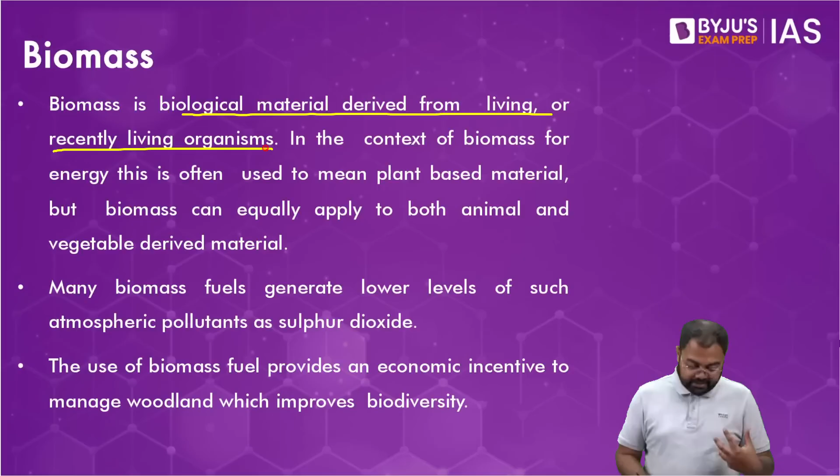Now, feedstock is nothing but the raw material. There can be multiple kinds of raw material—you can have waste, crops, wood. There are multiple things that can be used as feedstock or raw material for biofuel production.

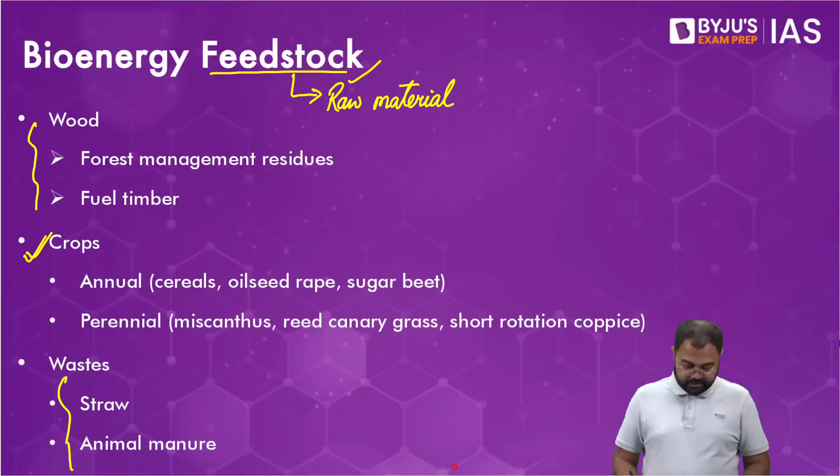So if you see, we started from bioenergy. We see that there are energy crops, which we'll discuss, specifically cultivated to provide bioenergy. So bioenergy, biomass, feedstock, energy crops, biofuels—there are five terms. Let me explain. You have bioenergy—what is bioenergy? Energy from biological source. So this becomes bioenergy.

And then there are specific kinds of crops which are cultivated for this kind of energy production—these are called energy crops. So energy crops are the crops that provide energy. What is the source of energy for us? What kind of nutrient is the source of energy for us? Carbohydrates, right? So these energy crops are the sources of carbohydrates.

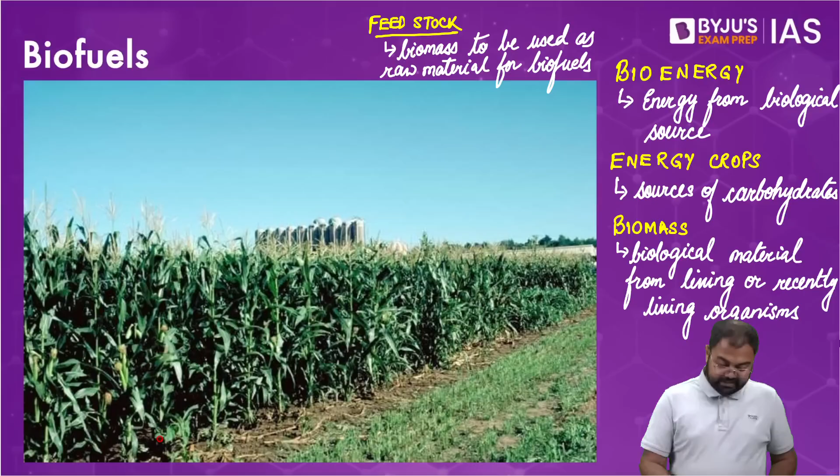And then lastly we have the term biofuel. So what do we mean by biofuel? Any hydrocarbon fuel that is produced from organic matter in a short span of time will be called biofuel. That's the basic difference between biofuel and fossil fuel. Fossil fuel also comes from organic material, organic source, but over millions of years. Whereas in case of biofuels, something similar happens in just a few days or a few months. So short period of time is very crucial here.

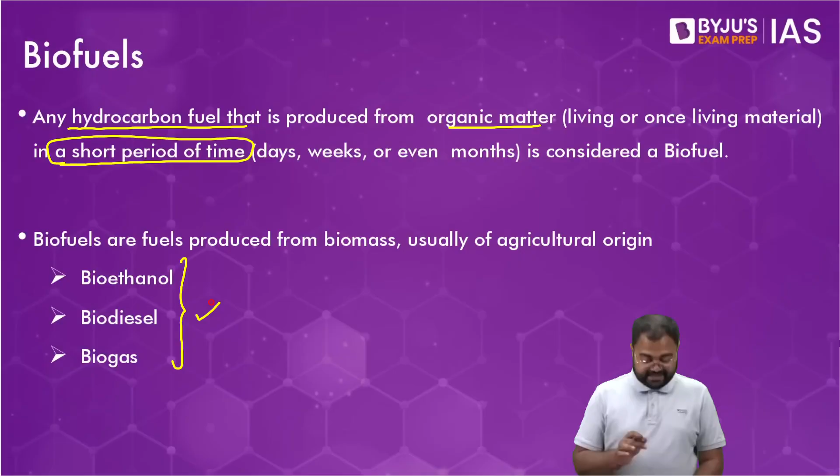Now, in this scenario, there are different types of biofuels - we have bioethanol, biodiesel, and biogas. When it comes to biofuels, we divide all the different types into different generations. This classification is done on the basis of what raw material is being used and what technology is being used.

So first we have the first generation biofuel, which is based on food crops - meaning the same food crops that we consume can also be used as a source of biofuel production. For example, we use corn, soya bean, rice if we want, potato, the oil seeds of different types of oils, and sugar cane. So all of these are based on food crops. That's why this is called first generation, where you can say the biofuels are competing with our food.

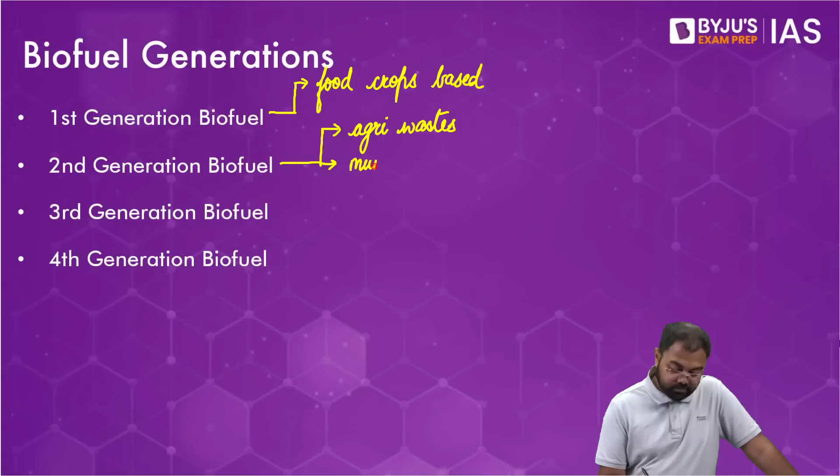Then we have the second generation biofuel, where we start changing things up. Second generation biofuel can come from agricultural waste, municipal waste, and non-edible crops. So instead of using something in direct competition with our food, now we are using something we are not bothered about eating. We would obviously always prefer second generation over first generation, but the problem is getting energy from second generation is not that easy. On paper this is what we want, but in reality it's not easy to get energy from here - the technology required is difficult, and that's why second generation is also called advanced biofuel.

Second generation is also called advanced biofuel because the technology required here is complex. It's not as easy to generate energy from these sources as it has been from food crop based sources, and that's why these are also called advanced biofuel. So that basically is our second generation.

Coming to the third generation of biofuels, there are two possible sources we can make use of: either algae for the generation of biofuels, or bio CNG. So these are the sources we are looking at when it comes to the third generation.

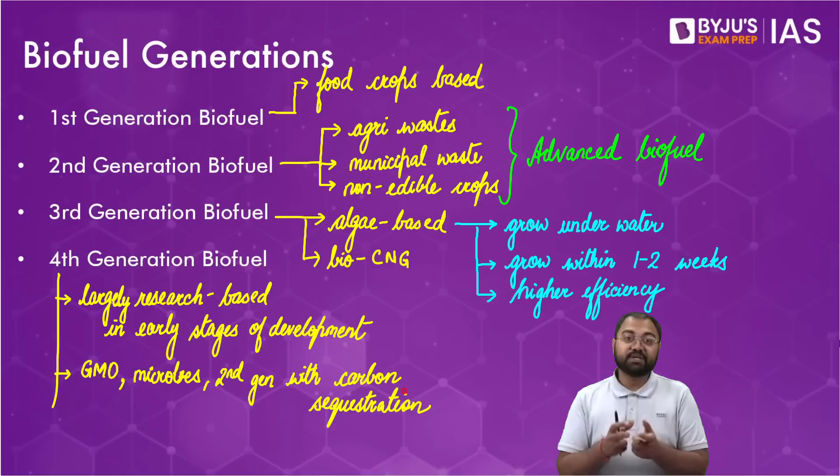This is also something that we are trying - that whatever small pollution happens because of carbon dioxide emission in the first and second stages, we want to get rid of that. Use the same source as the second generation, because that is largely based on wastes. So use the same source, but whatever carbon dioxide is emitted from there, take away that carbon dioxide, store it, capture it. That basically is called carbon sequestration.

What is carbon sequestration? Capturing and storing carbon dioxide - that basically is carbon sequestration.

So these are the things that are being tried. Fourth generation is not pretty important for us right now, but this is where we see we are heading in the coming days, and we would want to use fourth generation also if we can. But right now, remember that almost 85 to 90% of all biofuel even today is first generation. Second generation has just started taking shape in the past few years. Third generation still is experimental. Fourth generation right now is nowhere.

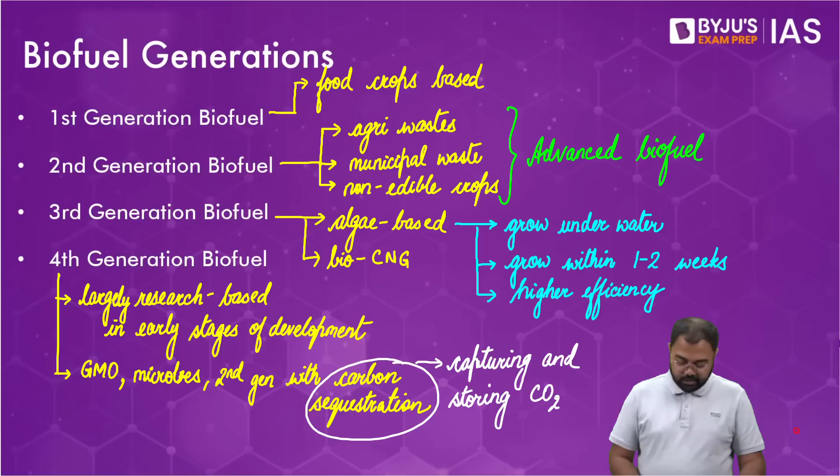So largely we are still in the first generation itself. Not only India, I'm talking about the world. The world right now is largely in the first generation, and we are still trying to move away from first and use more of second generation as much as we can. So we are actually trying to take care of, trying to get into the next stages.

So largely when it comes to the types of biofuels, there are two major types: biodiesel and bioethanol. Biodiesel is something that we get from vegetable oils through the process of esterification. Any vegetable oil or oil seed can become important here. And bioethanol is something that we get from the fermentation process of all these energy crops.

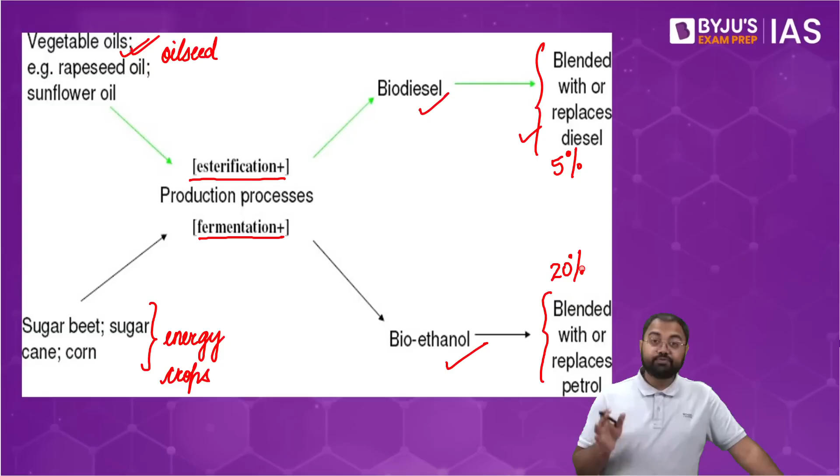Biodiesel is something that can be mixed with or can replace diesel. We'll go into details of how exactly these things will happen in India tomorrow. But we know biodiesel can be mixed with diesel or it can even replace diesel. In case of bioethanol, it can be blended with petrol or replace petrol altogether. So we are looking for a blending - India has a target of 5% blending of biodiesel with diesel, and a target of 20% blending of bioethanol with petrol. This is basically where we want to head in the coming years.

Both biodiesel and bioethanol are going to be very important because they have huge positive impact on pollution. For example, biodiesel can reduce the exhaust emission by up to 80%, carbon dioxide exhaust emission. There is no sulfur dioxide. Even particulate matter PM 2.5 and PM 10 can be reduced by up to 75%. Even when it comes to the flash point, it's higher, which makes biodiesel a safer fuel as compared to normal petroleum diesel.

There are so many things - they can provide significant lubricity improvement as well, becoming an easy source for lubrication of machine and engine parts, increasing the capacity and improving the working of this biodiesel. So there are all these advantages with biodiesel altogether, and that's why we want to use biodiesel as much as possible.

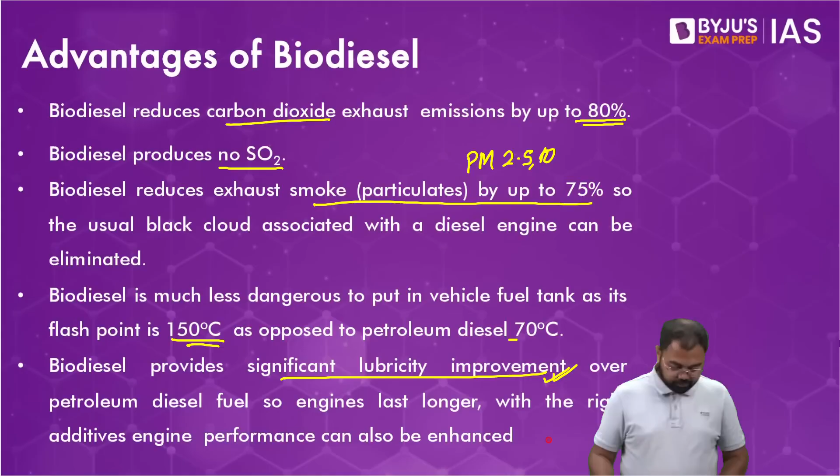But then all of a sudden, we saw that jatropha almost lost whatever value it used to have, because the conversion rates of jatropha were very poor. So two things happened with jatropha. Although it's not that we are not using it as a source today, we are not using it as a primary source. We don't look at jatropha as a primary source today. We used to.

Two things - one, it takes a lot of time to grow, takes 6 to 7 months for biodiesel production. That's one problem. And second problem is conversion rate is very poor.